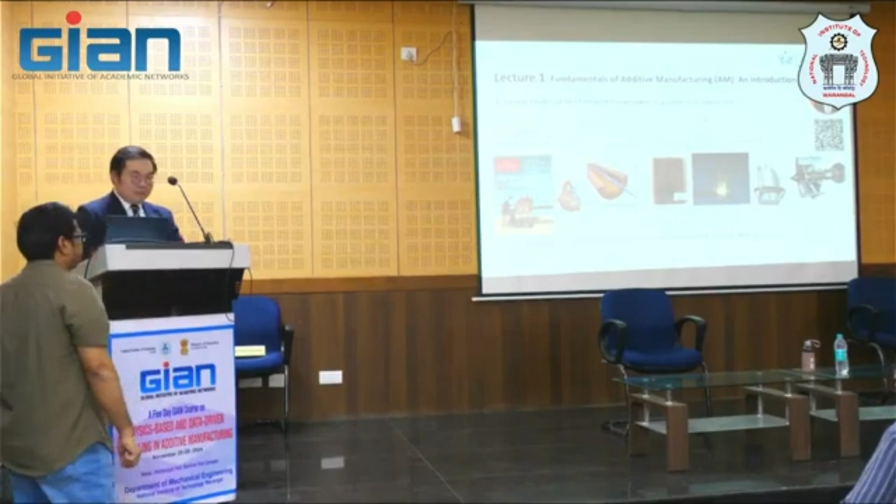I'm Chinnapat Panwisawas from Queen Mary University of London. It's a great pleasure for me to be here today, and to share with you some thoughts about the modeling of additive manufacturing, especially for metallic systems. And before that, I want to use this lecture to give some mutual understanding about what we mean by additive manufacturing, 3D printing, 4D printing, what they actually are.

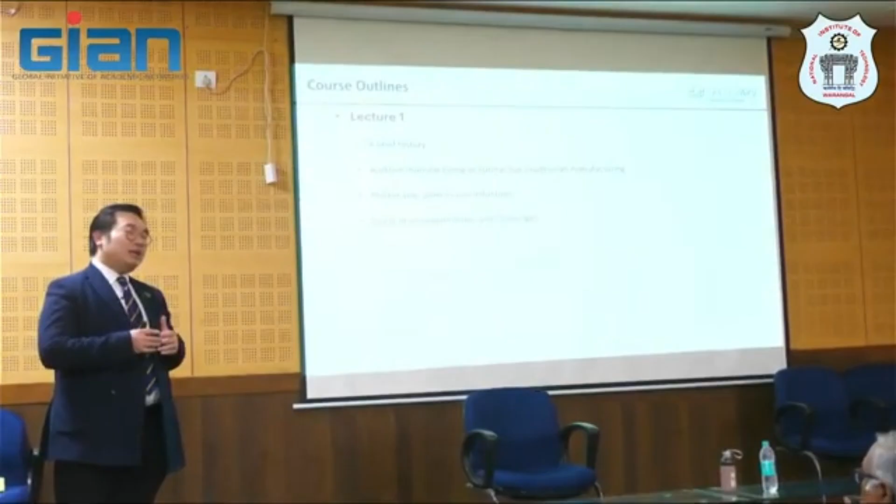About the outline of the first talk: we need to know a little bit about history, and then you will know that the concept of 3D printing or additive manufacturing is not new anymore. It has actually existed since the 1800s, something like that. But the way we use this concept for manufacturing is relatively recent, about 50 years.

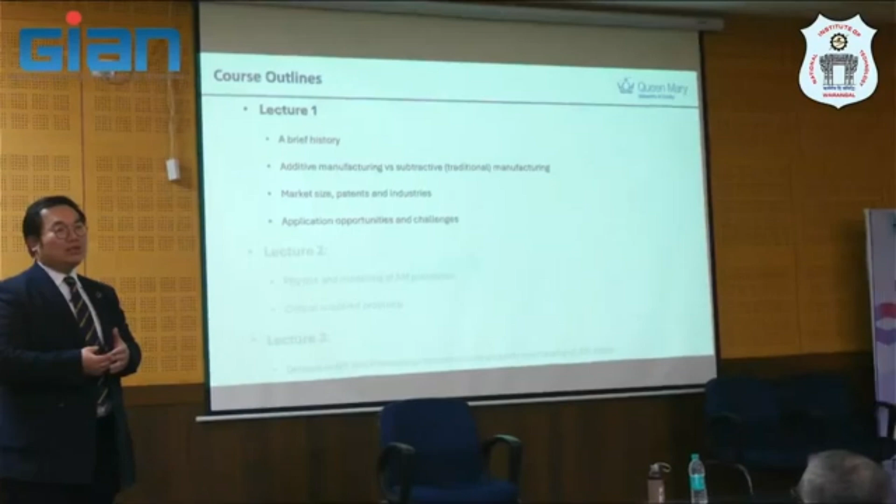And then after that, we will look into what is the difference, after the Industrial Revolution, from the traditional manufacturing processes, and then what the market and opportunities are that we have, as well as some challenges. So this lecture is intended to give the rationale or some fundamental understanding of additive.

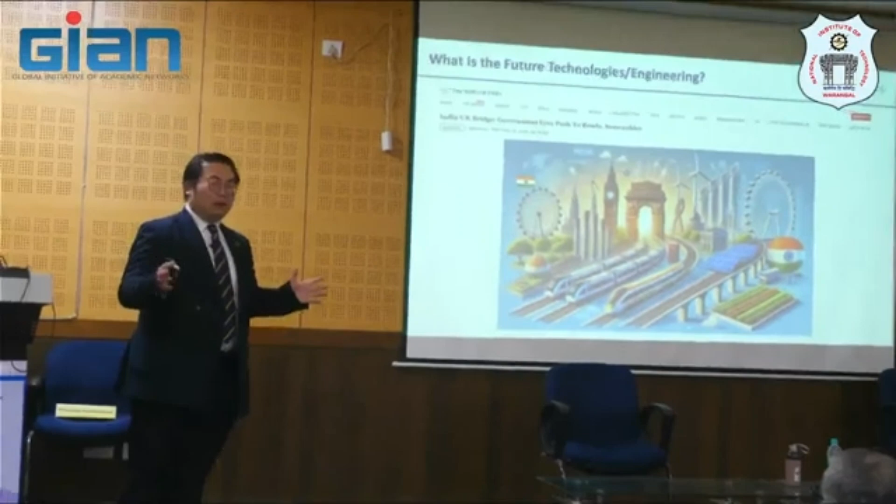So I just looked at this, it was actually released just this morning in the Times of India. I have seen an Indian-UK government program that wants to have a collaborative project. Don't look at anything, just the figure here. You will see that it means the future. We are talking about the future, right? The future is about green, about solar panels here, about wind turbines here.

And this actually creates an opportunity, not just for the UK and India, but a global opportunity that we can look forward to. One of the arguments about additive is whether it's worth investing, because it's quite an energy-intensive process. But if we understand the process very well, and that is the objective of the course here, I believe additive is one of the sustainable manufacturing processes where we can leverage the knowledge from science for technology take-up.

And I would like to start with something about the future. So this is the future that people are thinking of. I just borrowed this video from the Siemens company.

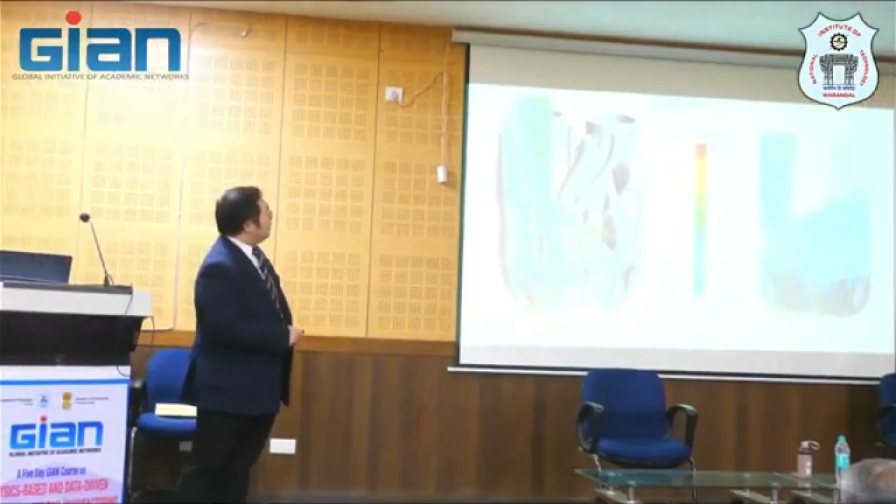Yeah, you will see from the CAD model to numerical simulation, and then going to the digital twin, engineering-based simulation. And again, this is a kind of design for manufacturing. This is a 3D printed part. Again, this involves simulation, CFD, STAR-CCM+ here for computational fluid dynamics.

And this is a robot-assisted manufacturing process. Again, this is a subtractive manufacturing process that you can learn about here.

The forces that push the robot away from the milling path can be calculated and compensated in real time, keeping the robot in its path. When it comes to operation, the digital twin can compare the sensor data of a real plant in real time with the simulation of its plant. The availability of the plant parallel to operation can be reliably predicted, and sudden disruptions become a thing of the past. But this is just the beginning. Digital twins with artificial intelligence allow computers to independently...

And then you will see previously the composition, that they have titanium or whatsoever. So just want to...

This is automotive application. The digital twin breaks the traditional paradigm and opens up extraordinary possibilities. That's why digital twins are the innovation backbone of the future. Siemens. Ingenuity for life.

Yes, and actually this is about the digital twin. It means different things to different people, but in order to get to that future technology, the digital twin of those fancy components, we need to understand what happens at the material scale. And what I'm going to talk about today is how to link material and process together. And that is the next slide.

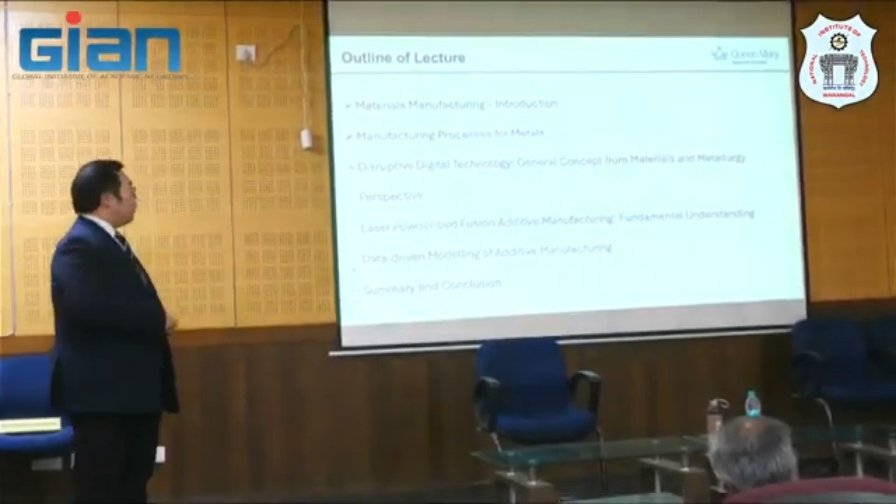This is one of the 7 additive manufacturing families following the ISO standard that I was going to talk to you about. What is the fundamental of that? Why is it so concerning? Why is it so interesting as well? Papers published in Science and Nature talk about closing the gap of 3D printing with the material, for example, that you may have seen in recent years. And then what is the perspective for me that sets the scene for the next few years about data-driven modeling for additive manufacturing? And then I will summarize the first, introductory talk later.

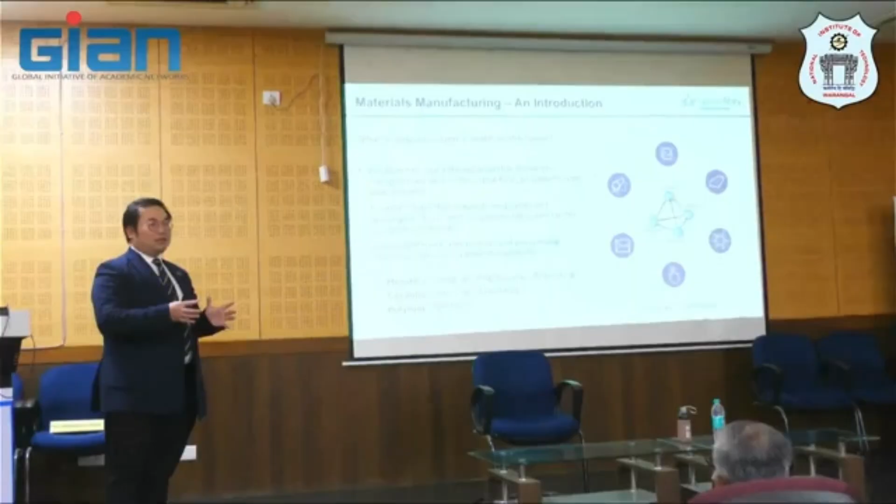So what is materials and manufacturing actually? When you talk about materials and manufacturing, it seems to be something related, but normally people seem to neglect both of them from each other. For example, it's evidenced by the departments. They will have a department of materials and probably manufacturing, or even mechanical.

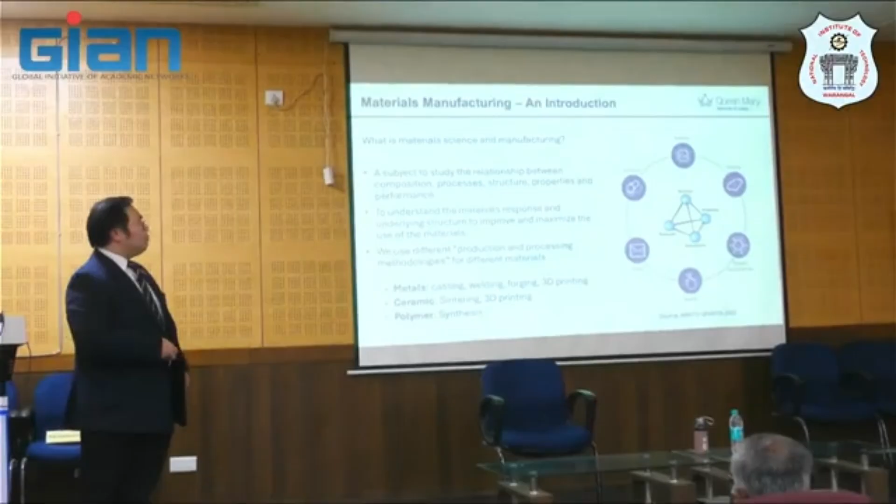I think it is important not to separate them, but to study this. What does materials science mean? It actually studies the relationship between composition, process, structure arising from the processing that you do, and then subsequent properties and the performance. And understanding this will improve and unlock the potential of the material that you use, to give it the maximum or full potential.

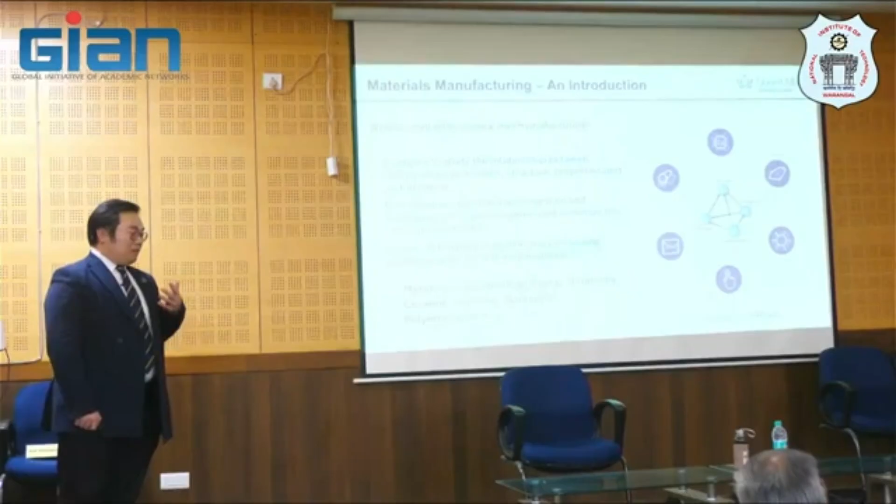And then normally we will use different processing techniques or methodologies for different materials. 3D printing is one of them, used across not only metal, but ceramic, polymer, and composite as well. So it gives flexibility of the design and also opportunity. But again, in order to make it right the first time, we may need to understand the process more. And this is what the course is about today.

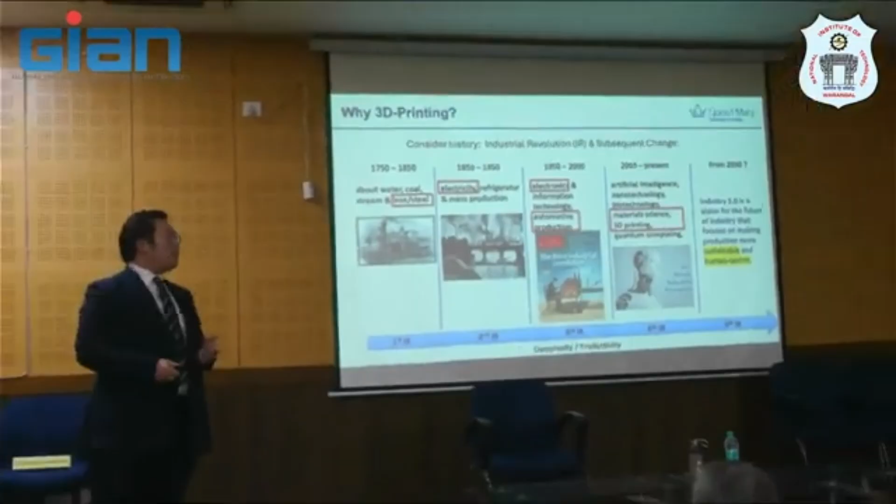If you look at the inspiration from the industrial revolution concept, the first ever is around the pre-Victorian age. You know that people knew how to make iron or steel systematically, but even in prehistoric times a lot was known already. And then with the first introduction of electricity toward the beginning of the 19th century here, refrigerators and mass production came, and this is where the new ways of producing things came.

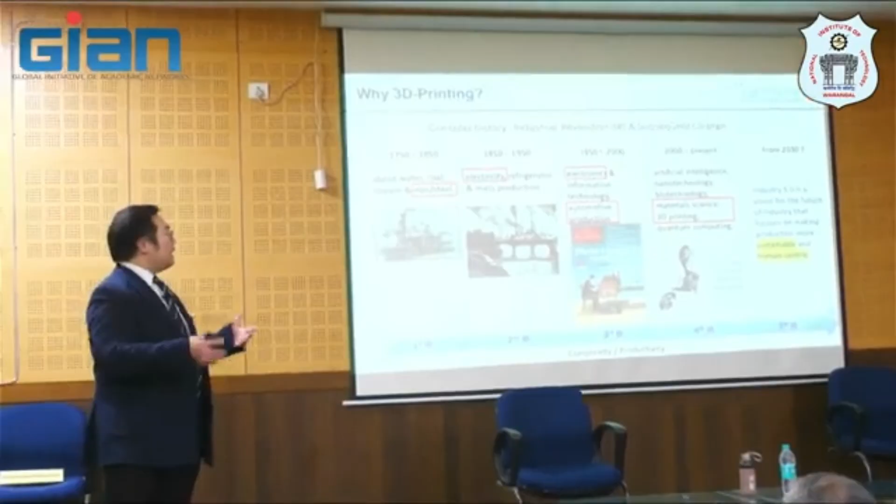I just want to emphasize this, and then we have another third wave, where we have new ways through electronics and automation processes, a little bit of robots coming in, to change the way we manufacture things. And after that, just very recently, artificial intelligence, nanotechnology, including materials science and 3D printing, play a role to revolutionize the way we make things as well. So from electronics or automotive, we make something better rather than wasting a lot of materials, by about 90%. I will talk to you more about that later.

And now we know how to make calculations faster by quantum computing, for example. And this will be the vision into 2030 onward, in my opinion, or even starting now: Industry 5.0. I don't want to talk anymore about 4.0 because we need to look ahead, when we have two important words, which are sustainable and human-centric. That means the interaction of humans and also sustainability is an important factor for AI and data-driven models or data science in the future that we use to make things better.

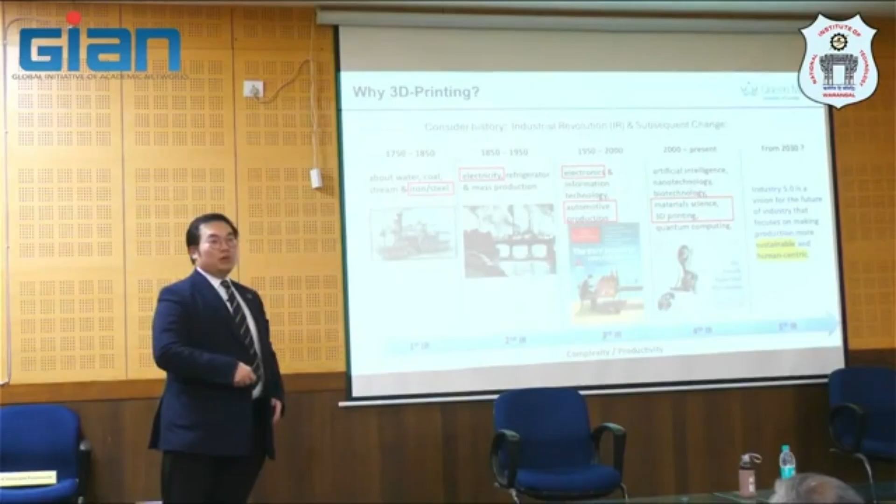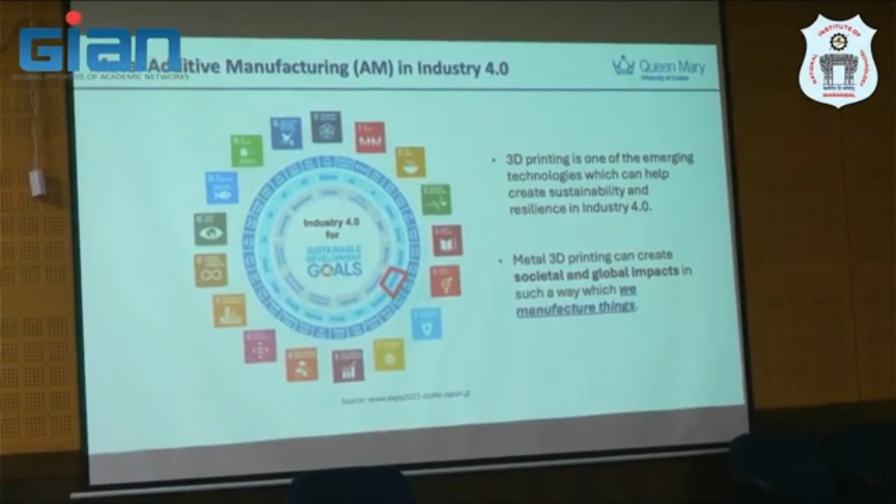And having said that, I give an example from another country in the East as well, Japan. They define 3D printing as one of the emerging technologies that we need for Industry 4.0, but they even introduced a new policy for 5.0 already. And this can create a social and global impact on the way we manufacture things. That is the importance of 3D printing. But the next step, when we realize how important this actually is, how can we make it?

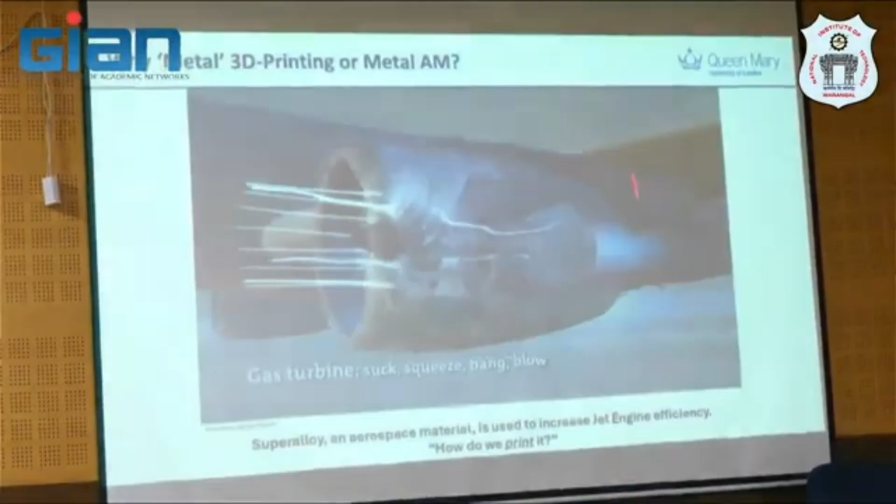And then we need to step back a little bit to see what we have now. So for example, if you are looking at the 3D printed jet engine that I mentioned earlier, I would need to emphasize that this is the high value added part that some of you may do research in aerospace material.

Your concern is, for example, you may not be able to replace this investment cast turbine blade at the moment, because the strength is actually compromised using 3D printing, but there's some way using electron beam melting that you can actually fabricate it in a single crystal. Again, a lot of research is going on to make that happen.

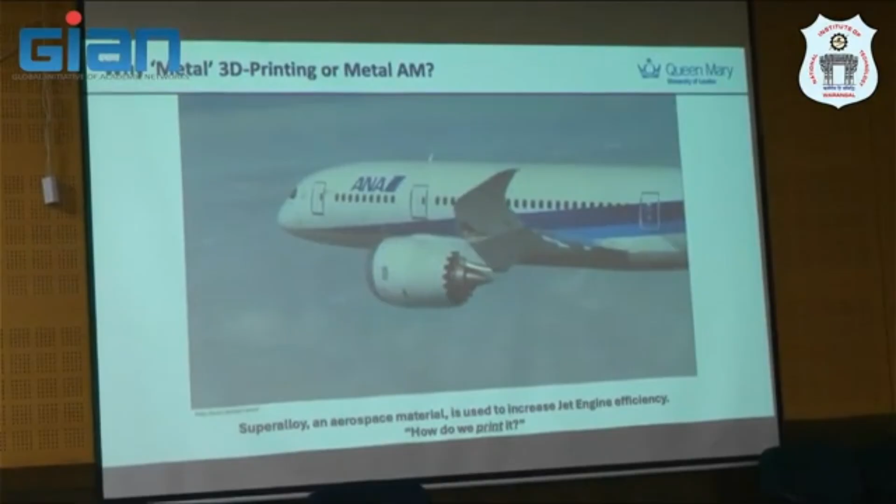Or if we try to print this jet engine, you may need to think about other components. For example, the first pieces of 3D printed part were flying in the air in 2012 by, what is the company, GE? Yeah, it's actually a fuel nozzle that I will give you some introduction to later.

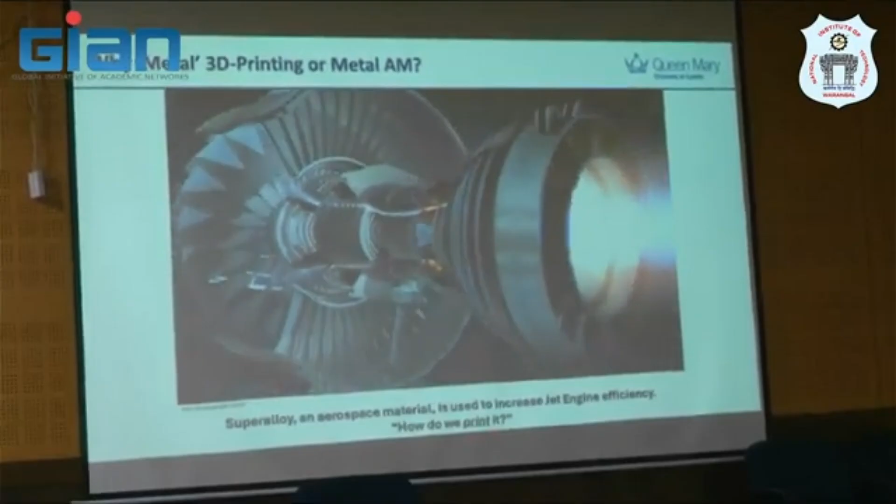So in this one, that means we need to understand not only the engineering requirement, but also we want to place the material in the right place in order to make it robust, and then manufacture it in an efficient way. So we hope that 3D printing can revolutionize or change the way we make the jet engine.

But just keep it in mind, and my question to this is how we print it, and print it without defect, because if it contains some defect, you're not going to find a defected blade to carry 300 lives. It's not good, right? So we need to make sure that in terms of material science, metallurgy, and also processing, we make it more regulated or standardized.

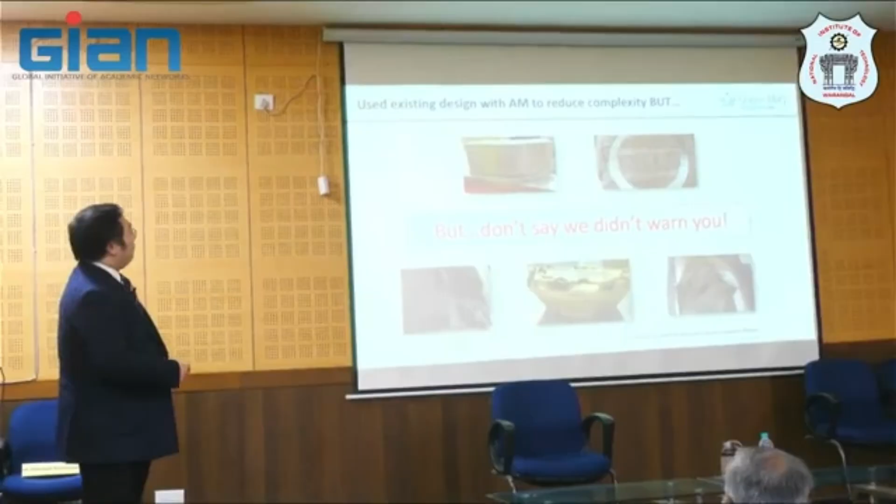So as I said, people are talking about 3D printing, but you will see this slide borrowed from NASA, right? Talking about, okay, you get a lot of defects, especially when you print a big part. And this is why we need to warn you that it's not that easy, not like printing polymer, resin, or some other component. Printing metal is challenging and something that we need to take care of from a scientific perspective.

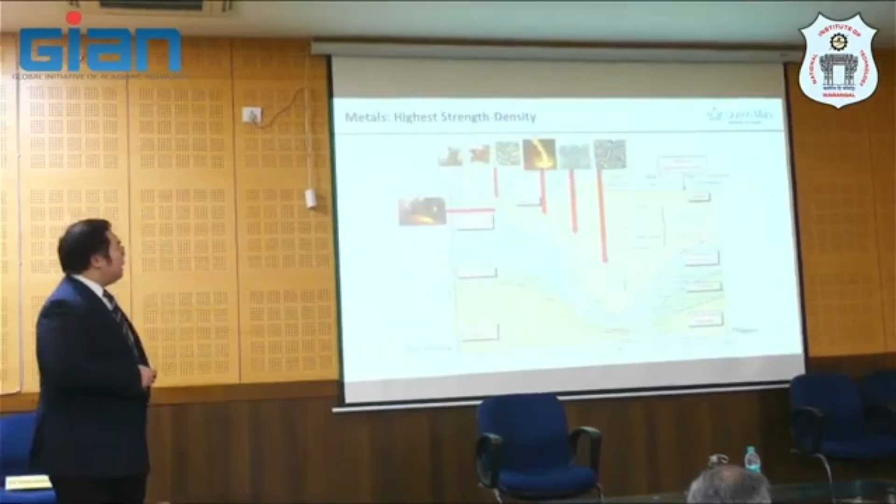So if we look at metal or metallic 3D printing, as I said before, every time we discover or know how to make things, probably at the very early stage, India has done very well with casting or steel making, as you know, you have a company on that.

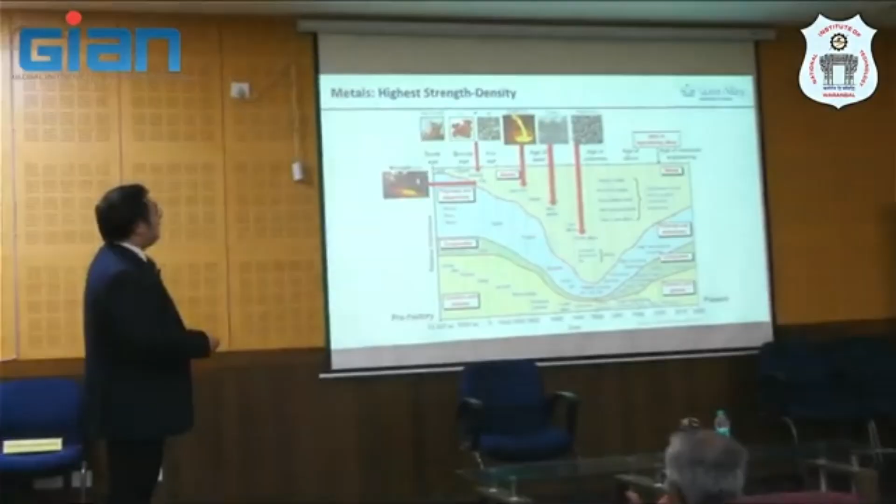And then what I'm going to say is that every time a new era comes, the age of, let's say, Stone Age, bronze, iron, or steel, and then superalloy, which is the high performance or heat resistant material here, you will see they have different requirements for different smart or advanced material. And now this is the birth of, you may have heard about, high entropy alloys, but again, this is just the way we want to map the whole material spectrum in this one chart.

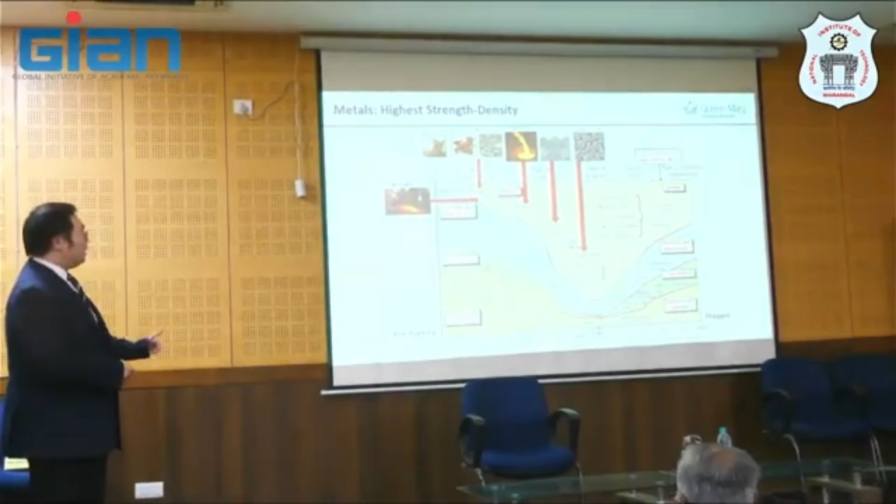So the future is going to be something lighter, stronger, a strength to weight ratio, which is reducing the weight but also keeping the strength, and how can we make it? So Professor Kumar may talk about design of experiment for metamaterial structure or lattice structure later.

Again, we want to understand this. Why? Because when you print titanium and print nickel or print shape memory alloy, it's probably a totally different story. So we need to understand material science first, as well as the processing of it. So this needs to come as a package. And then this is a summary of one example, actually, superalloy.

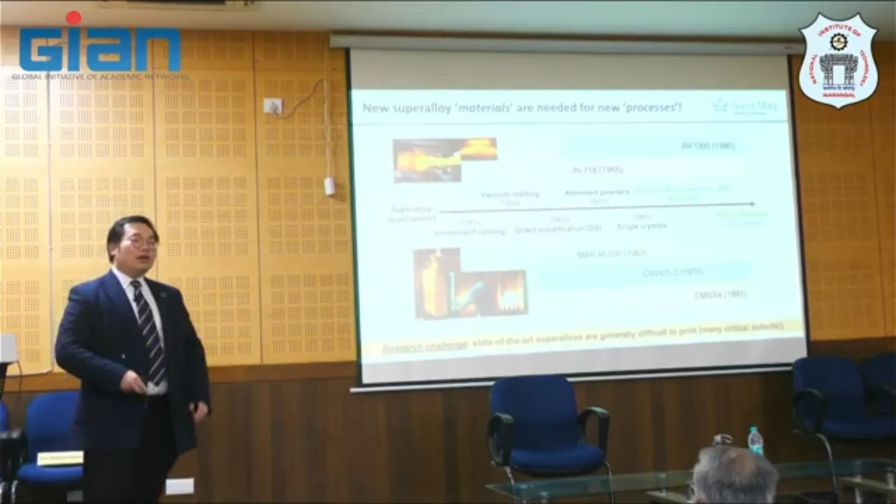Is there anyone here who knows about superalloy? High temperature material, heat resistant, highly resistant to degradation, right? Like creep, fatigue, blah, blah, blah. So superalloy is one of, I would say, the most clever materials on Earth. It's about 80 years old now, since its inception in about the 1940s by investment casting.

But again, the graph here shows that when you introduce a new process like directional solidification, single crystal casting, or powder metallurgy, you usually introduce a new composition or new material to optimize for that process. So this is an example, like casting. This is likely to be the first generation superalloy optimized for casting, which is MAR-M 200.

And then you have directional solidification, which is actually a polycrystalline structure, CM247 LC, but people are trying to print 247. I would say, what is the problem?

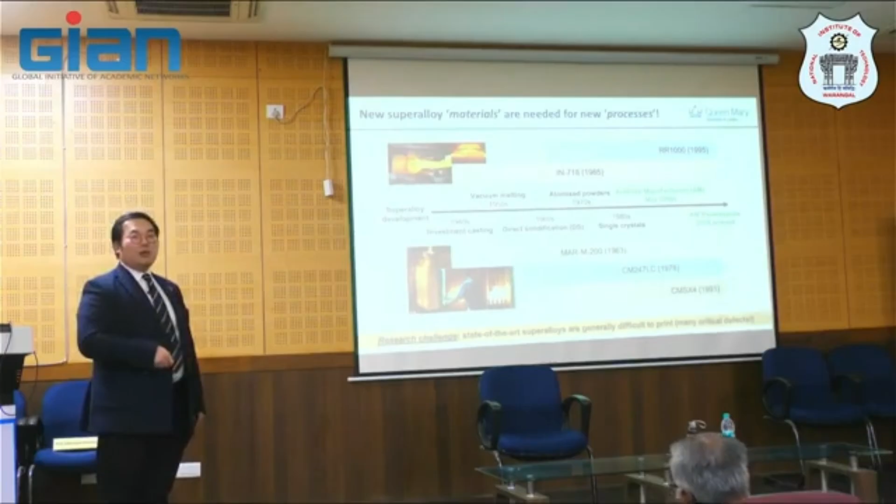And then single crystal, this is the CMSX4, which is a second generation superalloy. And again, each composition here is optimized for the process, and that works, actually. People are even trying to replace CMSX4 with high entropy alloys, but when you consider all the factors, it's not really happening yet, because it isn't worth investing in a new composition which doesn't have a superior combination of properties like

the existing material. But my question on this slide is: when you have a new process like additive, which is actually not new, metallic printing was introduced around the mid-1990s or about 2000, can we use the existing material, not only superalloys, with the new process? The answer I will show you later is probably slightly no.

That's because when you decide the composition for each process, you think about different criteria, or you engineer it differently. So that's why we need to understand both metallurgy or material science and the processing science of it. And before we go into the process, I want to give you some inspiration about 3D printing, the process we call additive manufacturing.

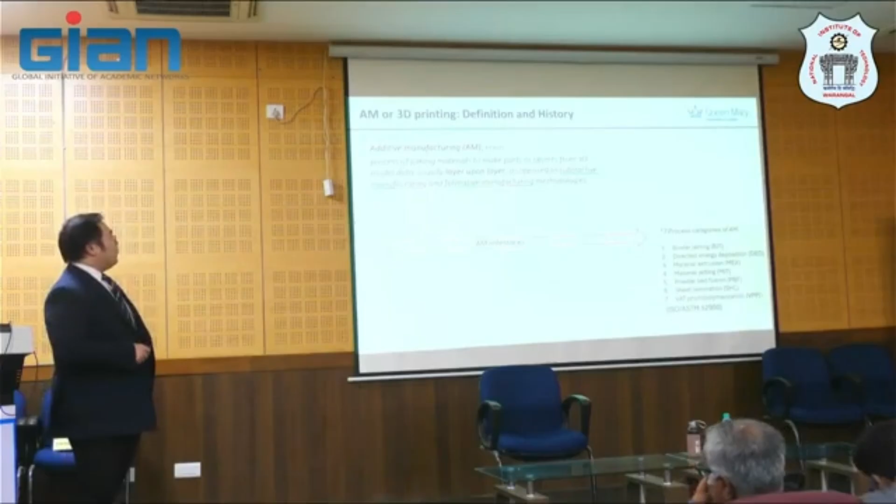What is that? If you take the definition from ISO ASTM 52900 here, it says the process of joining material to make parts or objects from 3D model data, layer by layer, as opposed to subtractive or formative methodologies. I will give you some examples later of what is meant by subtractive or formative technology.

And actually, as I said before, additive manufacturing has seven process families or categories, listed here. Everything falls into these seven, believe me. You have a lot of abbreviations, but they fall into these seven categories. Binder jetting I'm not mentioning much, but for example, Desktop Metal lets you deposit your binder onto the metal powder bed, create a green part, and then sinter it later.

Directed energy deposition is used a lot now; one of them is WAAM, wire-arc additive manufacturing, where you use a wire and melt it layer by layer, for example to repair a turbine blade or wind turbine. Material extrusion is similar, but not the same, as MIM, metal injection molding. With that one you have a mold, but with extrusion you don't have a mold, you just extrude your material after combining your binder and your material together. This can be used for metal as well.

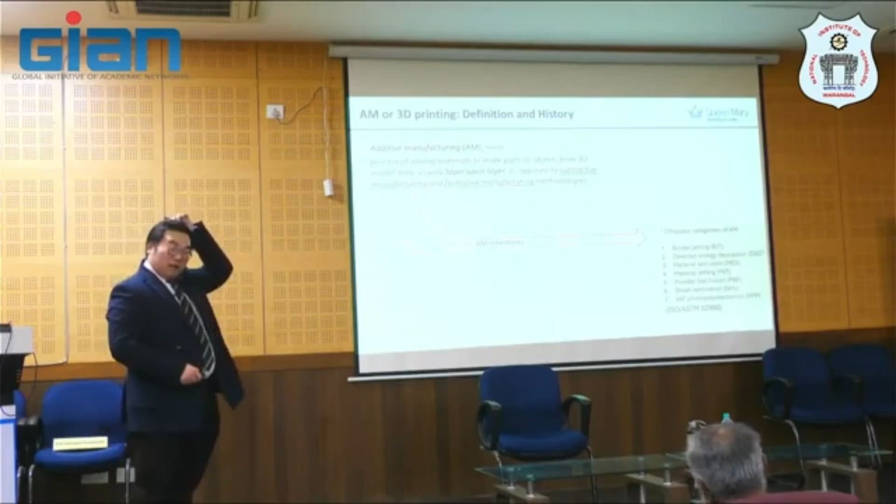Material jetting is where you deposit liquid metal, or some material, and create the 3D structure. Powder bed fusion is something we're going to talk about a lot. It was previously called selective laser melting, but under the standard now, even in publications, we no longer use selective laser melting. The Additive Manufacturing journal will reject based on that; it now has to be called powder bed fusion. Sheet lamination is another process. It's not a very popular research area, but there's something there.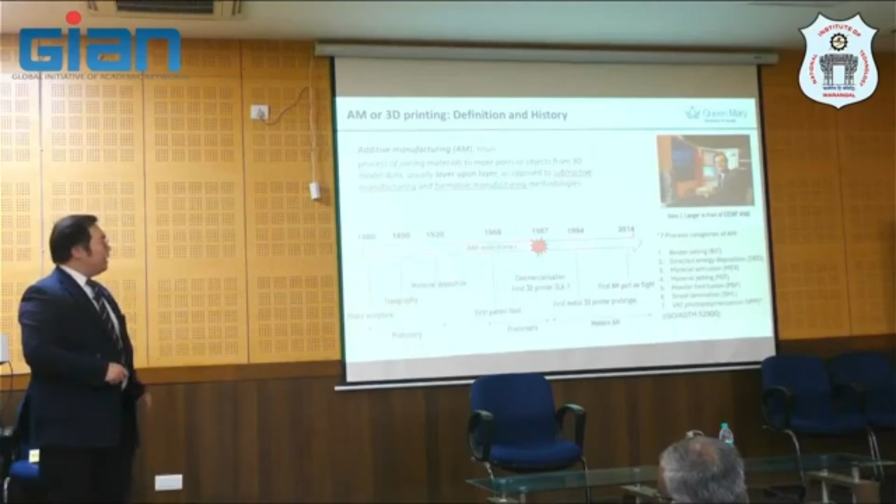Believe me or not, it's been more than 60 years now since the inception of the first additive machine ever. And it was commercialized nearly 40 years ago, in 1987. It's not new technology, but the way you make the material in the jet engine is probably new. Then you have the first metal printer prototype in 1994, just pre-millennium. And then the first part to fly, by GE, around 2012 or 2013. So this is entering the modern additive manufacturing we are talking about now.

So he's quite an important guy as well. I think you know the EOS company from Germany, right? Or US, I can't remember. I'm not an experimental guy, but he's the one looking at the very first model of the EOS machine back in this period, about 30, 40 years ago.

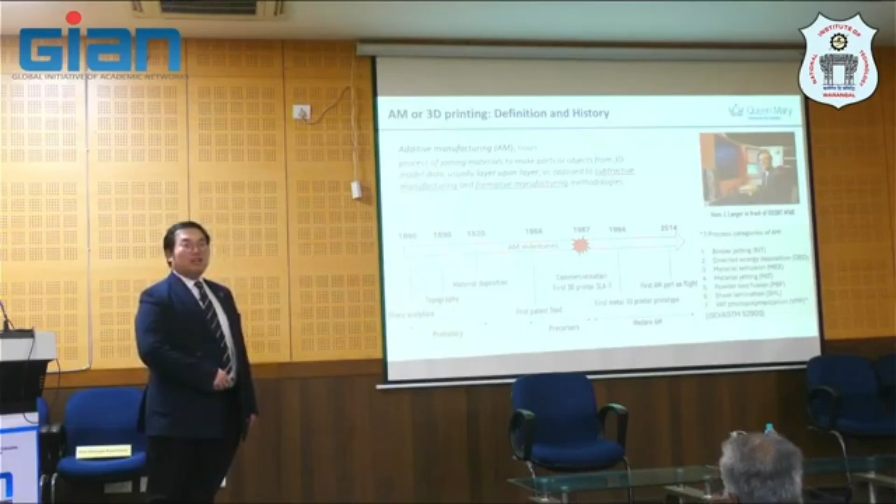So the prehistory of the photo sculpture, I'm talking about here, and this is because we're looking at the US patent back in 1864. Actually, you have something like this, that you try to basically add material bit by bit. At that time it's not layer by layer yet, but this is a concept of additive. You don't actually machine something out, but you add something in to create some structure. And this we call the prehistory time of additive.

And later in topography, you will see in about 1892, you actually have the way to manufacture this contour map. So the way you do this, you actually add layer by layer. Like this is kind of Lego pieces that you build a kind of mountain or whatever structure you can imagine here. And this one is likely looking like additive. You add layer by layer, and then you create some 3D structure here.

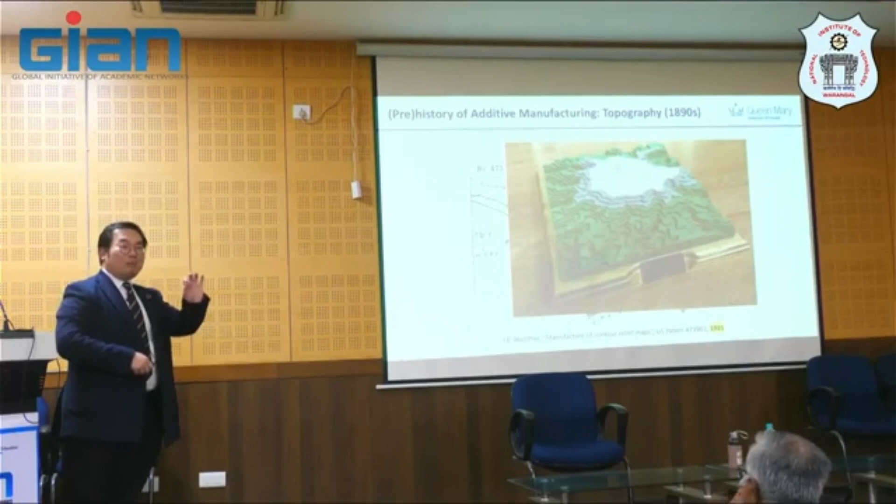But the mesh size here or the pixel that you deposit is quite coarse in this sense. But let's imagine this is just 1892. And the next one is a patent on material deposition actually filed to make a new decorative article here in 1925.

And after that, in early stereolithography, the first ever patent to build a two-laser system, now we use laser to build a 3D construction of photosensitive polymer. Okay, it actually starts in the material polymer. So this process is optimized for polymer. That is the message. And then this is the method, along with the apparatus scheme or drawing that shows how to make this production for this polymer using two lasers here.

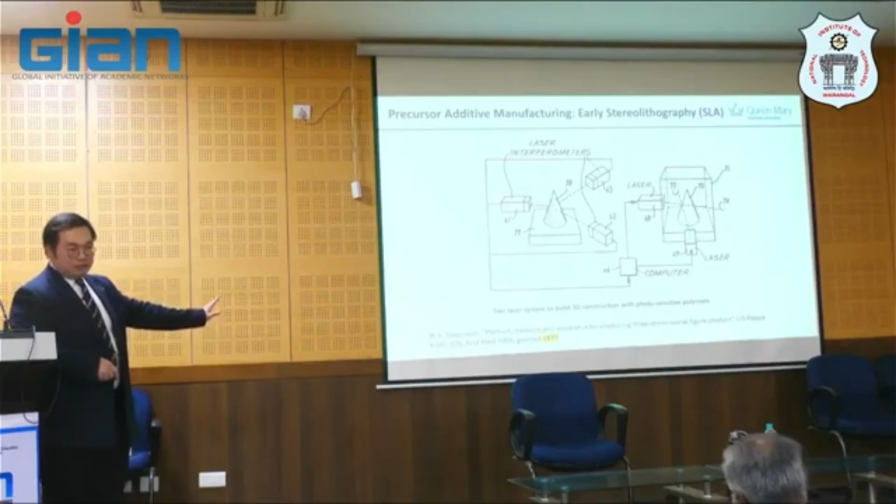Again, this is the patent granted in 1977. So I will base the date on this documented evidence here. So that means this is probably, we can say, a very early stage of modern additive manufacturing machines.

So the next one is about one Japanese guy called Dr. Kodama that actually proposed something on the new 3D printing. Again, it's based on the idea of stereolithography, coincidentally. And then he needed to actually withdraw his application for the patent because of a funding issue, something like that. Because as you know, to apply for a US patent is actually a lot of money, it's an investment, right? To let the world recognize it.

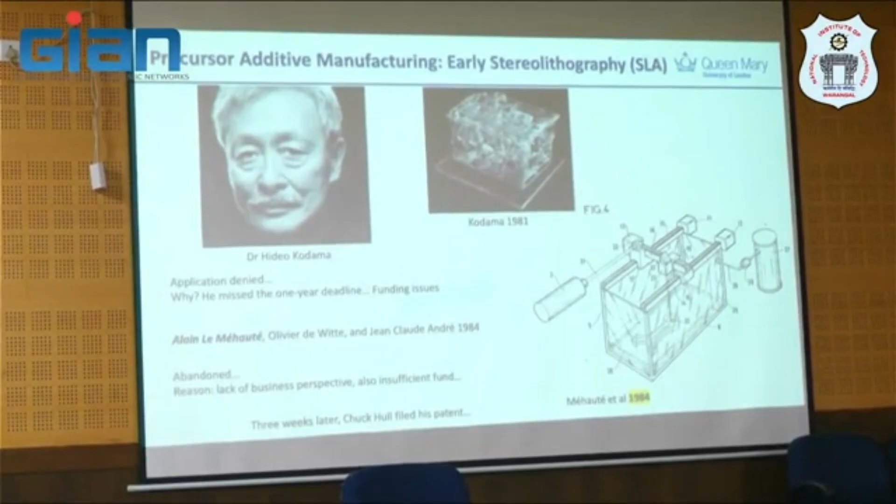And someone said to me that this is going to be a very expensive process. If you talk about additive manufacturing or 3D printing for some high value added part, you're not going to waste your money to print something that doesn't actually have some value, right? Because additive is for niche applications, like implants, not construction for sure. We're not going to print metal for construction.

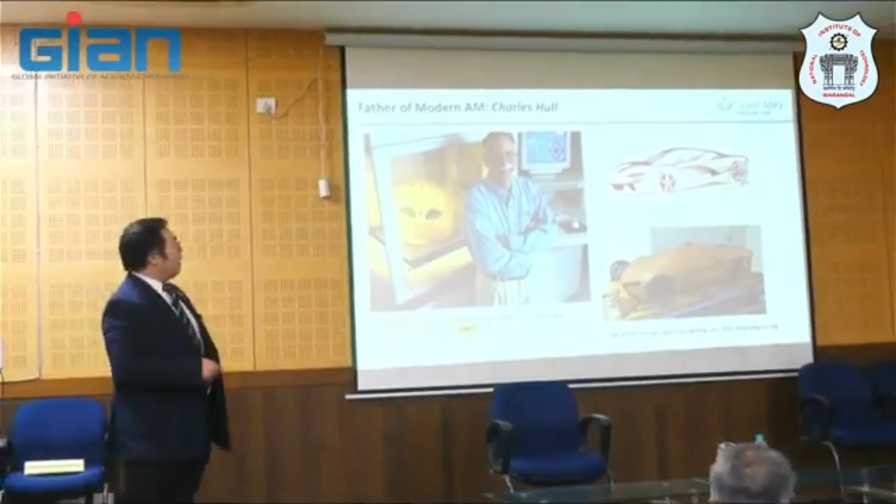But if you look at, for example, the automotive area, like motorsport or luxury cars, you see that the designing of the car is actually more expensive, twice as expensive as the manufacturing cost itself. So when people say that additive is such an expensive process, it's probably not true in some areas. So the answer to some of my previous colleague's question is that we need to select the correct application for metal 3D printing.

We're not going to print metal for everything, but there are some areas which require kind of delicate care, like blades, or in aerospace, some automotive parts. So that means engineers, material science, mechanical engineering or computer science need to be involved to move this field forward.

So I would like to give some review of the methods, give you some context about different modern 3D printing technologies. So the first one is stereolithography, or SLA. I believe you know it, or every lab, probably in your lab here you have this as well. It's a small and affordable machine that every university can have for students to do projects with.

So this is just a light, and then you have a resin, put it there, probably a heated substrate, and then you basically have a liquid bath here as well. So this is an affordable kind of machine that may be useful as well for bioprinting.

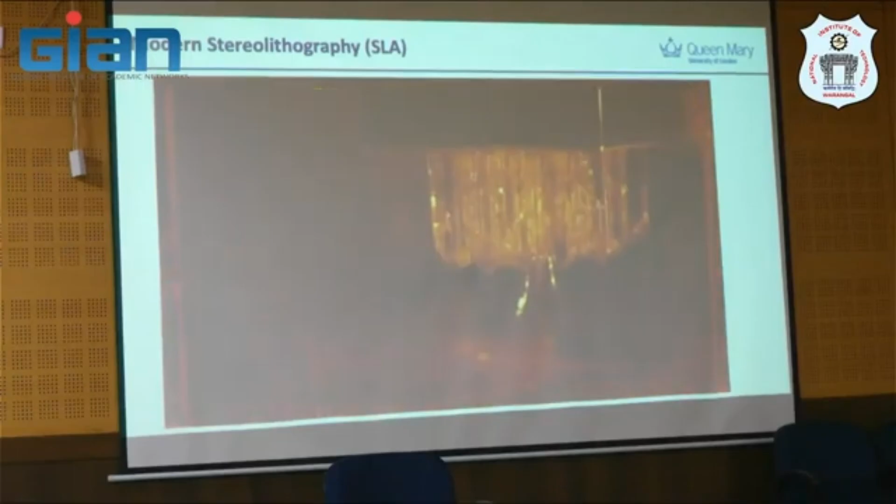This machine can be adapted for tissue or this kind of printing as well. But some research needs to be going on. Again, that's what I said previously: we need to select the material along with the process that we're going to use. So in this case, it's probably not for metal. But anyway, that's just to review, and this is called wire-based additive manufacturing.

When you deposit the material, this is the laser nozzle, right? And then you use arc wire, this is wire arc additive. So you add it layer by layer until you get the 3D structure here. So this one we call near net shape manufacturing as well, because you don't need to do much after that.

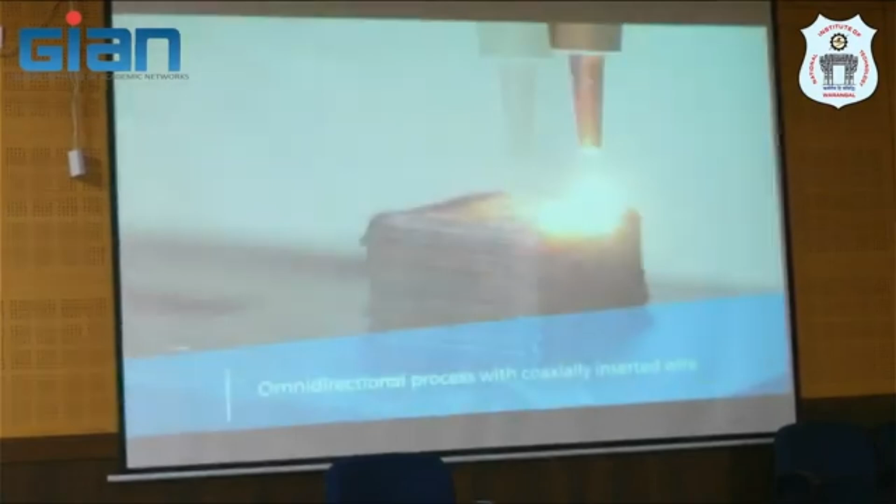It is a slow motion of these things. But you will see that it still has a problem. You see a balling effect or surface roughness here and a melt pool whatsoever. But this is something to concern next lecture, don't need to talk about now. But you see layer by layer here, it's like making a cake. You add layer by layer, and then you get the pieces of cake here.

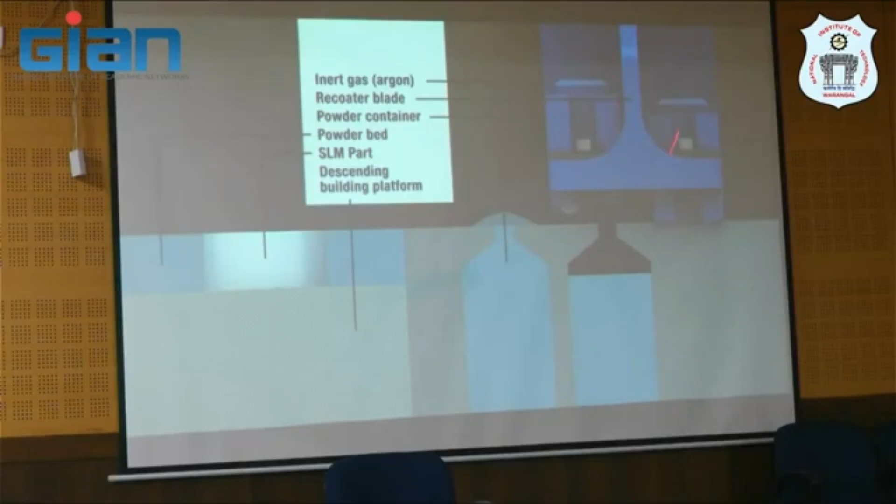And that's an example. The next example is actually powder bed fusion. This is something we're going to focus on in the next few days. You have a chamber here. You have the powder feedstock here. You spread the powder onto the substrate, however many substrates you have. And then you swipe it in another direction, and it goes into this used powder. And you use a laser to fuse them layer by layer until you create a 3D structure.

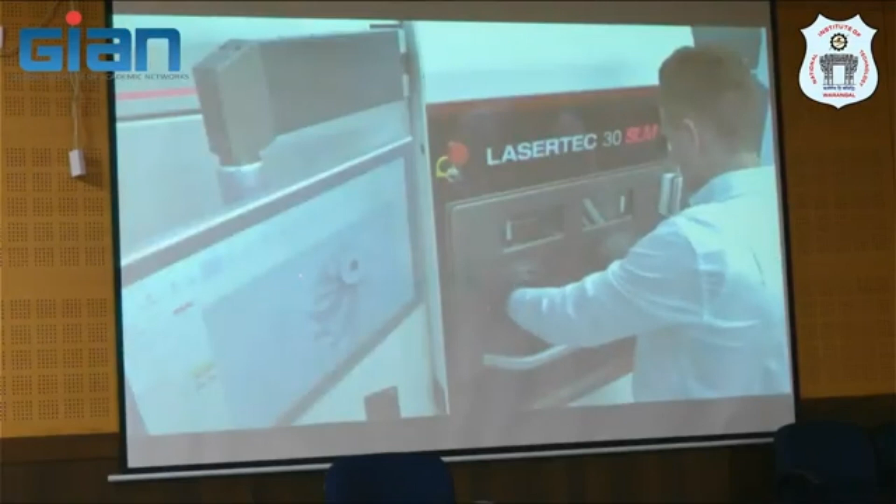In this case, I think it's probably a turbocharger for automotive. Again, this is a delicate part that usually takes about 40 manufacturing steps to manufacture, but you reduce it to one without waste. That is the key idea. But the thing that controls the quality of this part is actually the laser matter interaction, which we are going to focus on in the next lecture later today. You see now a lot of spatter coming out. And when you remove it with care, you will get the part 3D printed.

Again, the health and safety issue here is delicate, and it's an expensive process. That's why I said we're not going to print this one for a microphone, for example. It's too expensive. But if you want to do it on purpose, probably yes. We need to be careful about that. And then you get this part, and you can see that there's surface roughness and support structure associated with it. Again, this requires not only metallurgy but also engineering, mechanical design of experiments to allow this to happen.

So if we summarize this one quickly, the pro of this process is that you get a near net shape of complex geometry. That is why you use this process. And then you can do rapid prototyping. If you don't do something wrong, we expect to get less scrap and waste when you know the conditions well.

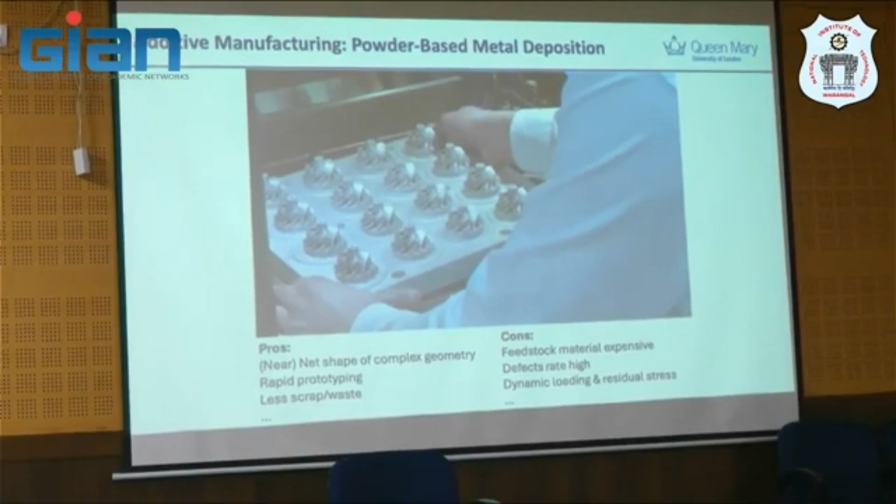And then the con, or disadvantage, of this process is that the feedstock at the moment is still expensive. High quality feedstock, especially for biomedical or medical grade implant powder, will be expensive. Titanium, for example. And the defect rate is still high, but this is why research is important, to reduce that once we understand the interaction in the material.

And then residual stress is another issue, and people look at that from the composition, processing, structure, and property perspective. This has become an issue, but now a lot of research is going on trying to make it possible. Like for the material structure, you can design a lot of properties outside the range of the bulk property. That is not possible using only a CNC approach, where you cannot get the internal structure at a micrometer length scale. So that's why the application is so related to the process you are going to use.

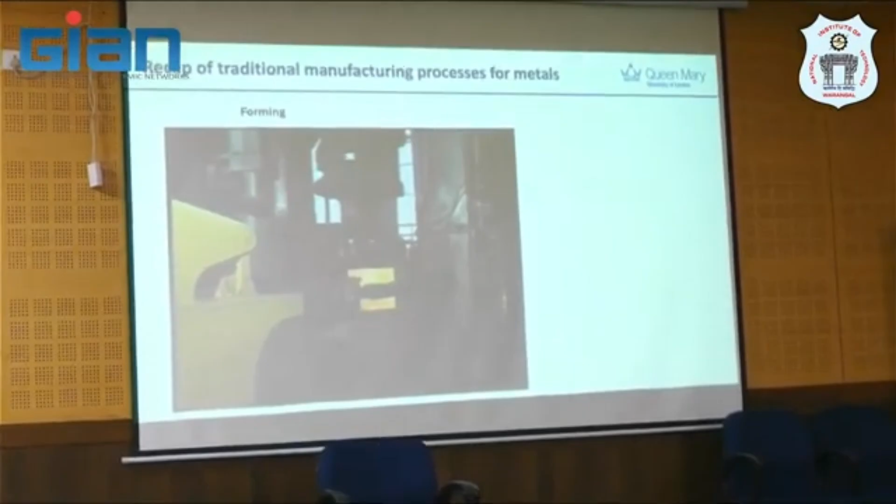To recap, that is additive manufacturing, but now we are going to talk about how we can replace those traditional processes, or even if we cannot replace them, understand what the traditional processes for metal manufacturing are. So we have forming, casting, joining, and machining. I would like to make a big distinction between joining and additive manufacturing. In joining, you sometimes don't need to add material. If you don't use filler material, you just use some power source and fuse them together. We call that joining.

The difference between joining and additive is that additive is adding material and joining them together. So that means, in my definition, welding and additive are different. But people may say it's the same. But anyway, I will show you why it's different later. Probably by lecture 8, you will understand why I make it different.

So this is a forming process, and this is a big forge hot ingot machine here. You will see, probably you sit in the steel manufacturing plant, and then after that you punch this. I believe mechanical engineering also needs to learn about manufacturing processes like this, right? You upset this one, you get some skin, you punch it, you forge it. And then the way you forge it, and the temperature and whatsoever, and then you drill the hole to do the ring rolling later. So in a very hot state, you drill the hole, do ring rolling later.

You will see that this is done with care. And this process has been done a long time ago. It's not a new process at all. Robotic or robot-assisted additive that you talk about is actually using something that already exists to do things here. And after that, you roll it. This one I want to say later is linked to the microstructure development.

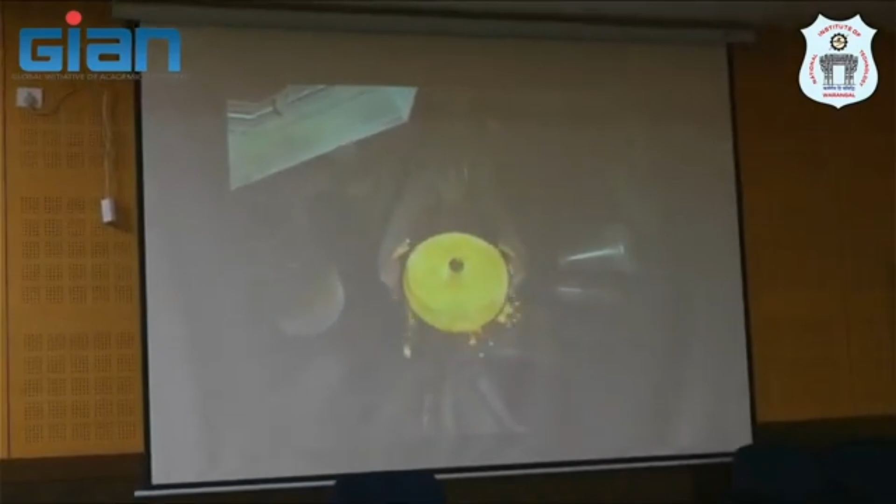The way they do it is actually to make a near uniform grain size in order to get the property across the section uniformly. Otherwise, if there is some weak area, you won't be able to make it fly. For example, if this one is a disc, or this one is the ring for an engine, for example. And that is the thing.

So later, in probably the next lecture or the lecture after next, you will see how we simulate this process to get the correct thermal and stress field in order to optimize the process and get better understanding when you want to change the material. Let's say from steel to titanium for a jet engine component, for example. And this is the thing.

So if I summarize this, we call this a subtractive manufacturing process. You will say that because it's subtractive, you actually waste a lot of money. Money and also material as well, environment as well. Microstructure is supposed to be uniform. That means it's quite a robust process that's used in quite high value added manufacturing companies.

And then the mechanical property, given that the structure and property are strongly related. So if you get the grain size, according to the Hall-Petch relation, you may get similar strength across the section. That is the ideal, but in reality, things like that need to be optimized. But anyway, leave that for another matter. It's not additive.

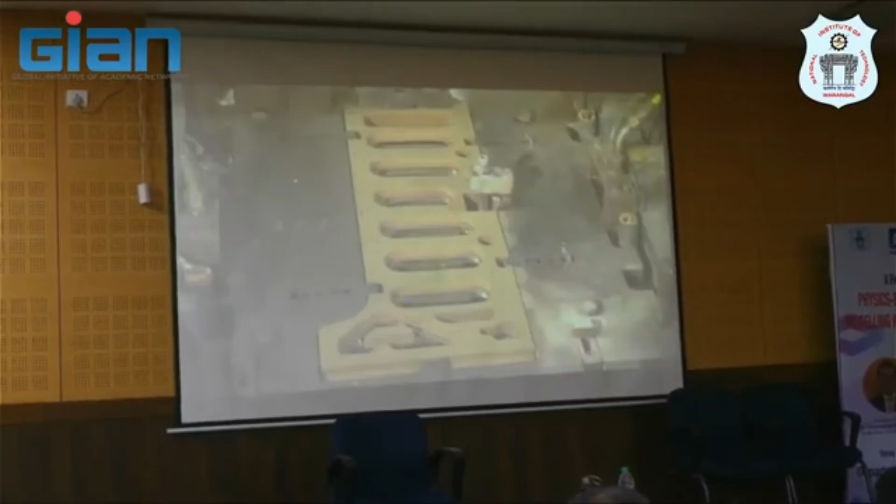Stop. And then they start to solidify and shrink a little bit to the central here. And later you will remove this part. Again, robot is used for this kind of purpose. And then you get quite complicated geometry from this process. And then you see this is an automotive part here.

Again, this process is ideal for complex geometry, usually with good surface finish. And then the con of this one, or disadvantage, is that the equipment is so expensive. And somehow you compromise the mechanical property.

Again, if you notice, the previous process relates more to the solid mechanics part, and this one is actually more fluid. Because you have the fluid, actually liquid metal as a fluid, flowing into the mold. So please keep this in mind, I will use this later.

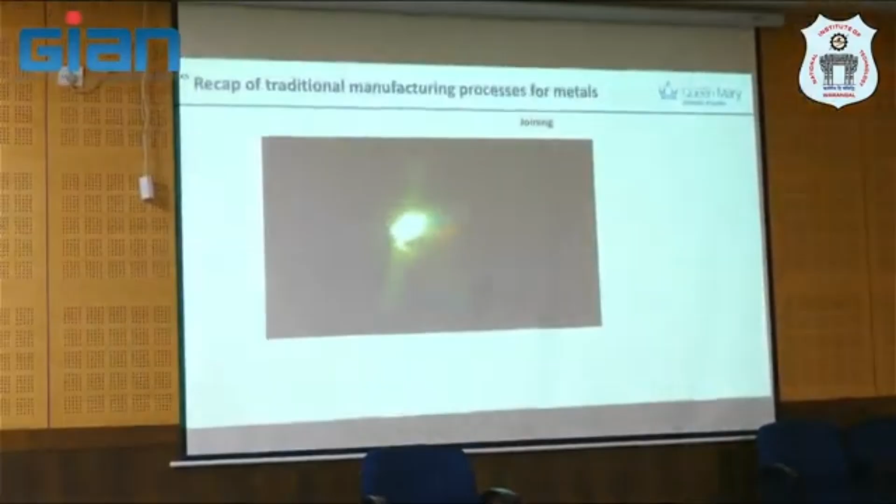And next is joining. As I said, welding. This is torch welding in this case. So you weld it. You have some material here, and then you melt it in a specific location, and then you join them together. Or you use something called, and this is the structure that you will see after that process.

And then sometimes you don't need any material to join them together. You just use a frictional force, linear friction, or rotational welding, friction welding. So you rotate the material at very high frequency to create a kind of joining area, ideally not to melt, but these two pieces will join together. And that is what we call welding integrity that you want.

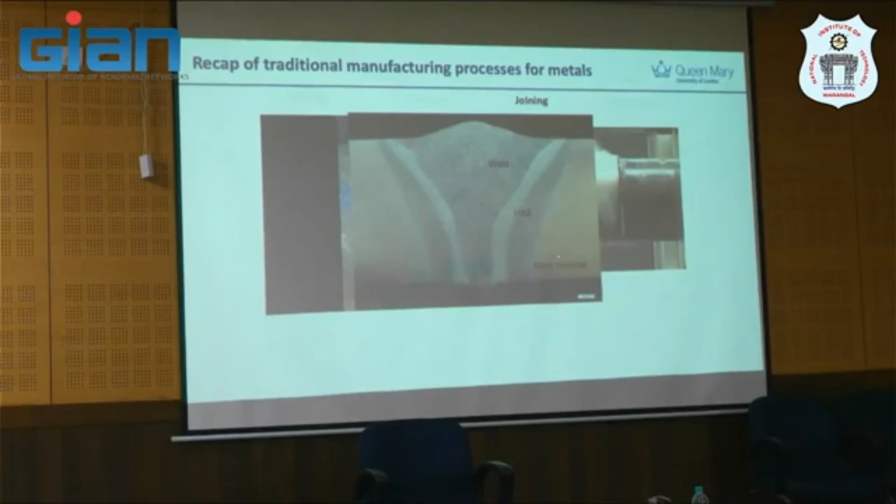The weld is the weakest area, due to the microstructure in the joining part being different from the parent and the heat affected zone. So here the phase transformation kicks in. The base material, heat affected zone and welded zone have different microstructures, which are subject to different properties. And then you may get the weakest zone in this area. And this may be an issue if you don't manufacture with care.

To summarize, this one is used for repair or rejuvenation of the material. And then mechanical integrity is important. You can use this for dissimilar materials like steel and nickel, for example. And then as a disadvantage, you may create some residual stress, especially in this zone. And this is the weakest area.

You need to take care of this area. The local microstructure in the weldment zone is changed. So you need to look after this very carefully in order to get the property right. And then fatigue and distortion under dynamic loading will be important if you don't make this right. And this will be the failure area for, let's say, a flying engine, for example.

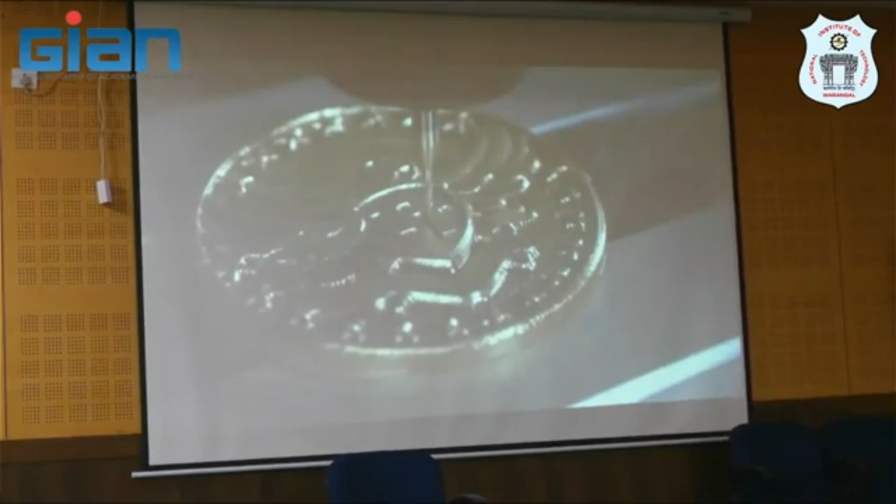Last but not least is machining. I think it's inclusive. I think you know a lot if you're familiar with 3D printing. Machining is a kind of CNC approach where we use the machine to remove the material to get the shape that you want. Again, the remaining material that you want is probably only 5 to 10% of the raw material you use. So this is not sustainable, but we have used this for a long time.

But the way to make it sustainable is probably dealing with the scrap or swarf material that you're going to use for future application, for example. But again, this is machining, traditional, typical, every country has it. And just to summarize, the surface control of this is very good. And then you get a very net shape, because that's what you want, like a screw notch or whatsoever.

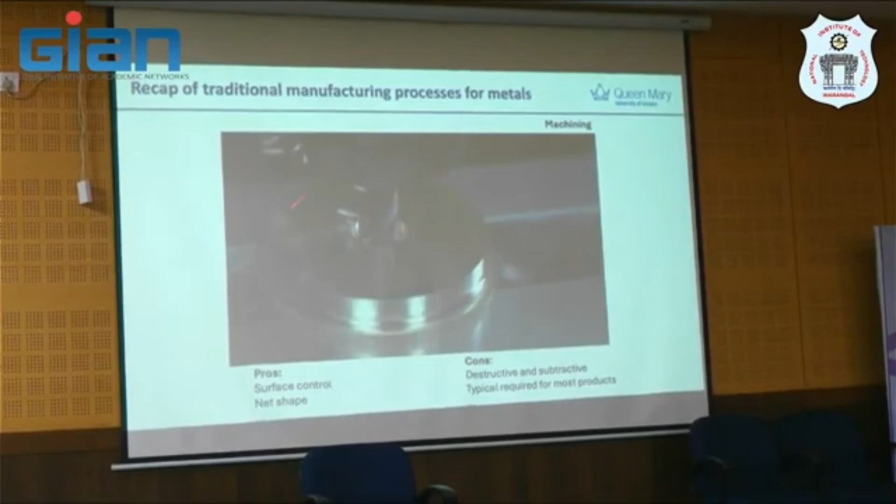And this is destructive and subtractive. That means you destroy material and then you remove it. And as I said, most products require this kind of precision. Some companies call it precision manufacturing, but again, this is not a very new manufacturing process. But anyway, just to make you aware of this.

But if you compare additive with traditional manufacturing processes in terms of economics, you will see that the cost per unit piece for traditional, if you do very small quantity, is so expensive. But if you do mass production, the cost per unit piece is very low. And this is preferable for a company, right?

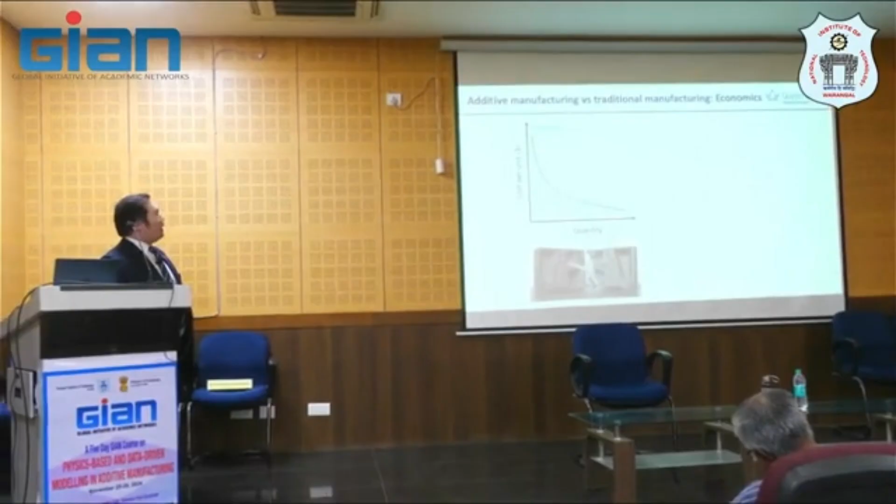But for additive, the cost per quantity is not very much different. So it's a very straight line. So whether you make 1 or 1,000, it's relatively the same. But again, the way you make it without waste is important. It's not just making it. It's about whether or not you have a robust approach to do it correctly.

There's a break-even point here. So this is not going to work for the traditional process, for example. You're not going to make a mold for this complicated shape. You may need to use another approach.

So with the new design and the additive process, you may be able to shift this one to the right, but again, it's not comparable. I mean, you shift the break-even point here, but anyway, additive is still better.

So if you compare the cost with the complexity, if you have a very small complexity, your cost is not a lot. But if your part is so complex, a traditional process like CNC or machining is so expensive. But additive is relatively in a different direction from this cost per quantity. When you have more complexity, the cost will be slightly increased.

It's not massive. Again, we may need to design with care for manufacture or do some analysis on thermal management on this part in order to get the minimum stress and distortion, for example. And this is perfect for using this kind of process for metamaterial design. And this metamaterial, which is the future of manufacturing, the idea is that you want to produce a new property far away from the bulk property.

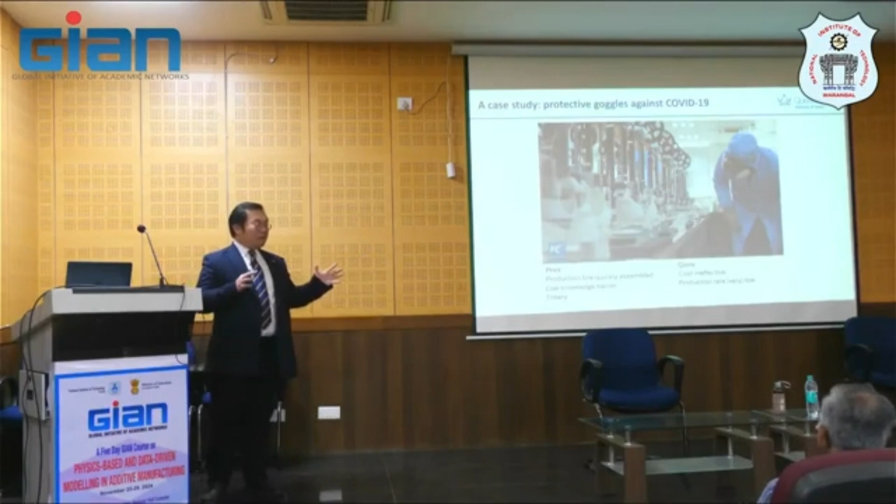But again, we also used this during a very difficult time in the past 3-4 years in COVID. The goggles here, we printed by additive, to fit different people around the world. For example, in Asian countries and European countries, you may not be able to have one size fit all. So this may be useful to print. And definitely this kind of 3D printing concept has been used in production line assembly already.

And again, for this one, you don't need to take much care. Even if it's important for life, it's not a flying component, right? It has a low knowledge barrier, and it was timely for this pandemic about 3, 4, 5 years ago. And the con of this one is it was cost ineffective at that time. It still is now, but we need to find a new business model to make it effective. And the production rate is very slow.

Even though we can use this fusion metal additive to produce this part, it's still relatively slow compared with a conventional process. But by the way, we get more personalized, and this is the future. Sustainable, personalized, and all these things.

And if you look in terms of the market or economy, the patents filed for additive since the first machine was manufactured, in 1980-something, you see it's increasing, from about 50 to now. Now it's more than this. It's actually shooting up to about 1,000 now. So cumulatively there are a lot of patents in the AM industry, in short, the additive manufacturing industry. But the applications submitted are far more, 3 times more than those accepted or issued. Anyway, it's still an opportunity.

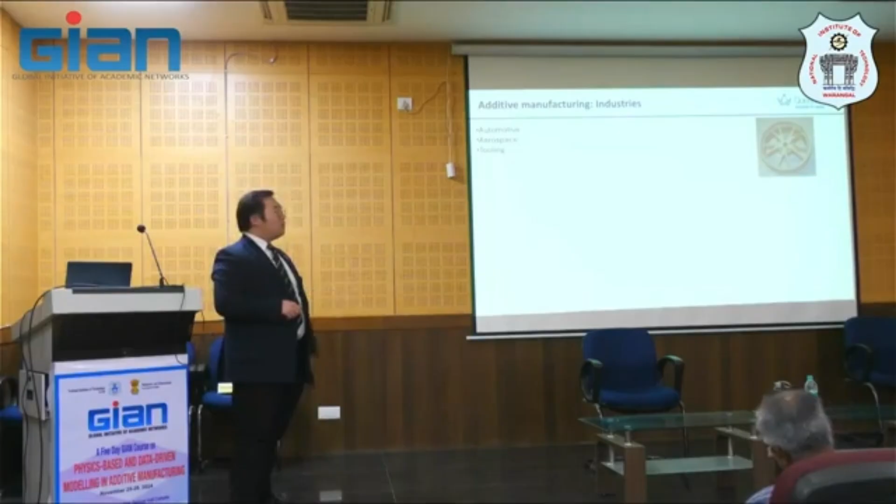So again, now it's more about where additive manufacturing in metal finds its application. In automotive, aerospace, and tooling, this is some example in automotive. BMW has used this to print some wheels. Again, this is a luxurious car, so you do it on purpose somehow, but some parts like a turbocharger are 3D printed now, with a lot of research.

I can say that I witnessed, 10 years ago, a big automotive company approach us in Oxford to research automotive parts for 3D printing. Having said that, you see a lot of automotive parts that have now been 3D printed. So it's not just speculation now, it's real, it's happened.

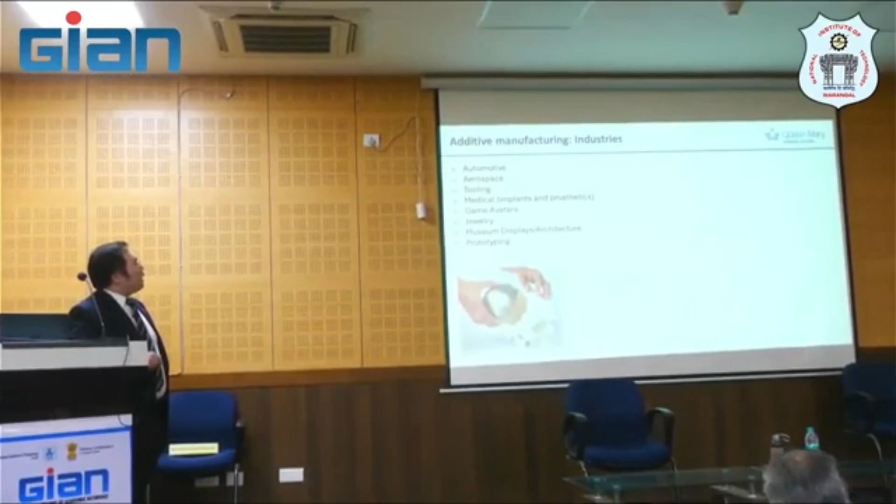So more than that, you also have some application in biomedical implants. I think we will hear more from Professor Kumar with a case study or application. And then you also have game avatars or something like that. This is also a big market for entertainment, as well as jewelry. There are a lot of patents filed in this area.

Especially, I would like to share with you that some colleagues in the UK did file a patent to fabricate platinum, actually successfully, using some nanoparticles. So this is something still going on. There is a lot of research that we need to do. Again, that is jewelry, so that means a small amount, delicate parts. Again, that is the application.

Or this is architecture or display, which you never could do before. You had to do it by hand, piece by piece, but now you can print it. And this will be useful not only for museum display or architecture, but it may be a prototype for assisting a medical doctor in learning or studying a very complicated channel. If you use an X-ray 3D scan and then print some sensitive location, this 3D printed proof is useful for education as well.

So there are numerous opportunities for 3D printing: design, as I said, ultra delicate components or geometry, rapid prototyping. You also shorten the design cycle. And you don't need unnecessary assembly. If you see here, this is a bone. Let's say someone has an accident, a bone fracture, and you want to print something that matches the cancellous bone with low stiffness using titanium. Now it's probably possible, but it's still in the lab, not commercialized.

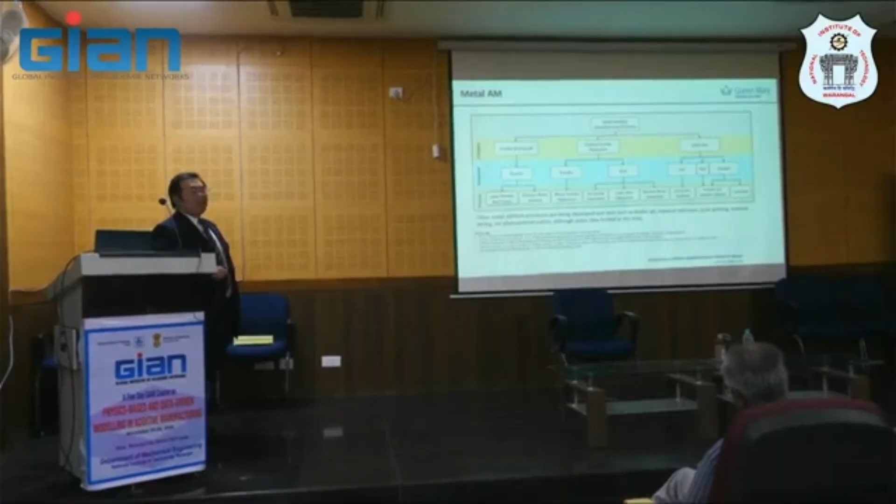So in the category of metal 3D printing or metal additive manufacturing processes, we have powder bed fusion, which is one of the standards. We have directed energy deposition. We have solid state formation like sheet lamination. The feedstock associated with powder bed fusion will be powder for sure. And then you may use a different process to process this powder, using a laser heat source or electron beam heat source. Again, they are so different in detail as well as in the physics, the way they melt. So this will be talked about a bit later.

Directed energy deposition. If you talk about powder feedstock, it can be an array of powder deposited onto the substrate. This process is known as blown powder deposition. And if you talk about wire, there are a few options you can choose: arc-based deposition, laser wire, or electron beam deposition. Again, this depends on the heat source you use. There are some detailed differences in different manufacturing processes for different materials.

And then last but not least, the solid state. So you may use ultrasonic additive for foil here, not much research from my side, or friction stir additive. I have some research on this. Or if you combine this and this, for example, we call this hybrid manufacturing. Again, let's leave this for later.

And then there are still other additive processes, like I mentioned, especially for metal, they can use binder jetting as well, material extrusion, material jetting, or even liquid bath is possible. Again, we're not talking about that for the moment. We're just focusing on the first two sections. I call these processes melting-based additive manufacturing. So you need to make it melt, make it liquid first, and then you join them together.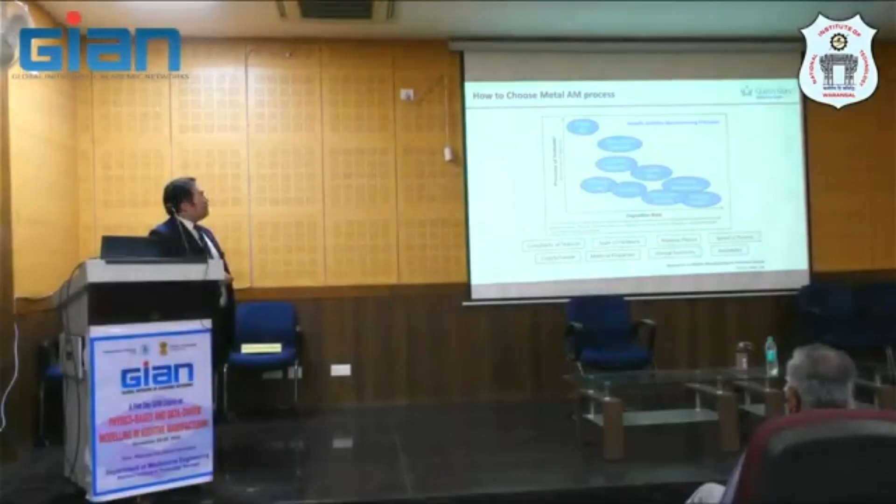And then how to choose one depends on different factors. I borrow from a NASA slide here: it depends on the cost, material property, internal geometry, availability, scale of hardware, complexity of features, the deposition rate, and the precision of the features are also big considerations. Why are people still using powder bed? Because at the moment it gives the highest resolution for metal 3D printing. The resolution is the same as the powder that you use. The finer the powder, the smaller resolution you can achieve.

For example, now there is a new term called micro LPBF. That means you print something at the micro scale, sub-micron powder length scale, for some electronic or delicate part purposes. Again, for arc-based deposition, the characteristic length scale is larger because the melt pool size is actually around millimeter scale.

So you're talking about large components, but still you need to think about residual stress development, or thermal management is key. So again, we will go to that in the different processes and the science behind that later. So this is in terms of process, AM process.

And then, as I said at the beginning, in additive manufacturing or AM we need to talk not only about the processes, we need to talk as well about the material. So this is a summary of the materials used so far, but not fully inclusive, in AM. When I say AM, it means LPBF using laser, PBF using electron beam, and then direct energy deposition. So you will see this is all metal AM.

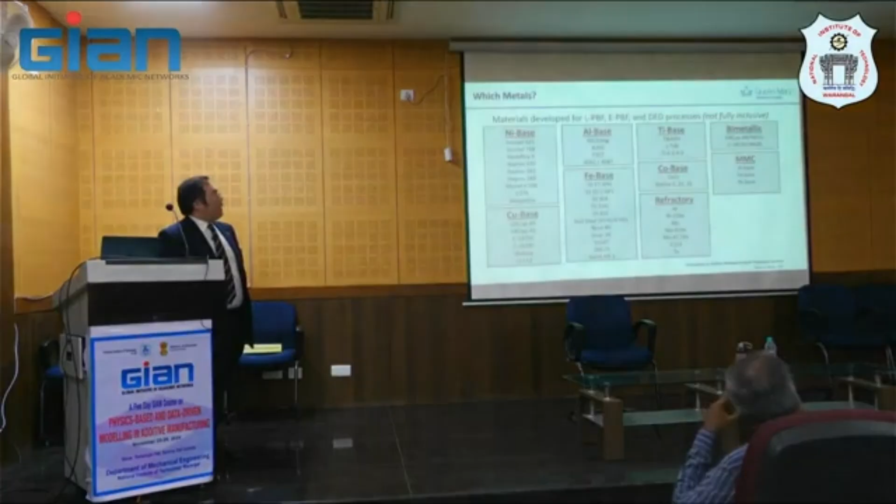Again, cobalt based, cobalt chrome, is also for biomedical application. Refractory attracts more attention at the moment. It's hard to print high temperature, high melting point material, used for space and nuclear application, like tungsten, moly, tantalum. Tantalum is also my research, for biomedical, tantalum printing. And also C103 is a new NASA program for niobium-based alloy for space application. Again, they use refractory, and then they have biomaterial.

As I said, you can print whatever you like. In the lecture later, I will talk about one technique we call in situ alloying. We mix something together using the laser, so we alloy them during printing. And then you can do bimetallic, and also you have some metal matrix composites.

It's a lot actually. The very first paper on high strength aluminum alloy, they tried to print it, a paper by Professor Tresa Pollock from UC Santa Barbara. Again, this is the same concept as casting, they use inoculant particles to break down the microstructure. Anyway, this research is still going on because there's not a lot of information, and also research for specific applications.

Again, I would say this is an opportunity, and as I said, every example I mentioned is related to the application you're going to use. So I think this has to come in a package. We cannot talk about them individually. Process, material, application have to come together. That's the key. And if we look again, nothing is actually perfect. We need to understand the advantages and disadvantages.

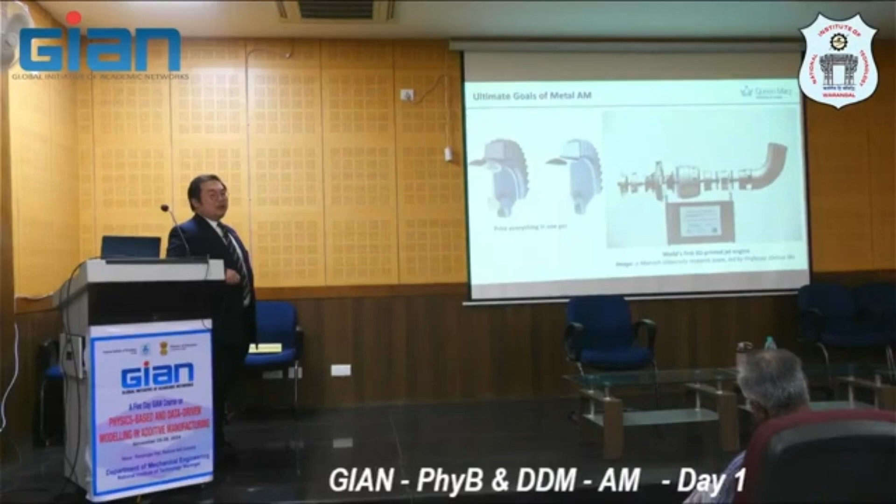And my intention is to use this time to prepare, because the next session will probably be long, so I'll try to introduce something first. Before finishing this, I think we still have time. Do you have any questions at all? I think I'm speaking too long. Any questions before we move to the last part, just to give an intro for the next lecture? Everything clear?

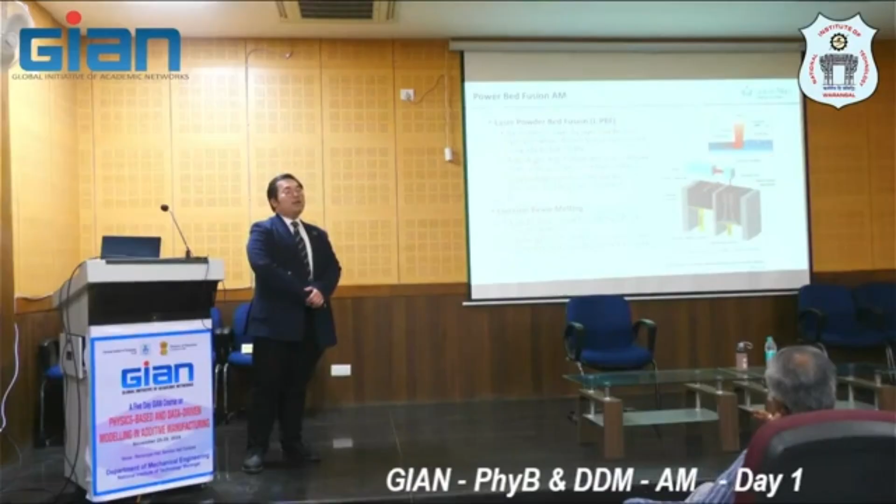Good, thank you. As the program stands, we talk more on melting-based additive manufacturing, especially the powder bed fusion process. As I said earlier, in powder bed fusion we have two heat sources we can use, either laser or electron beam. Laser, like EOS and SLM Solutions in terms of manufacturers, and electron beam, for example, the Freemelt company from Sweden. The basic process for LPBF is layer by layer. The feature is melted using a laser and solidified. That means there will be laser-matter interaction, and solidification will play an important role.

The advantage of this process is that this is the highest resolution metal 3D printing so far, so high feature resolution with complex internal designs like cooling channels. This diagram illustrates the printing process. But these advantages are limited by your build chamber. So the scale limit doesn't provide a solution for all components. Basically, you cannot print everything. It's about how you select which component to print.

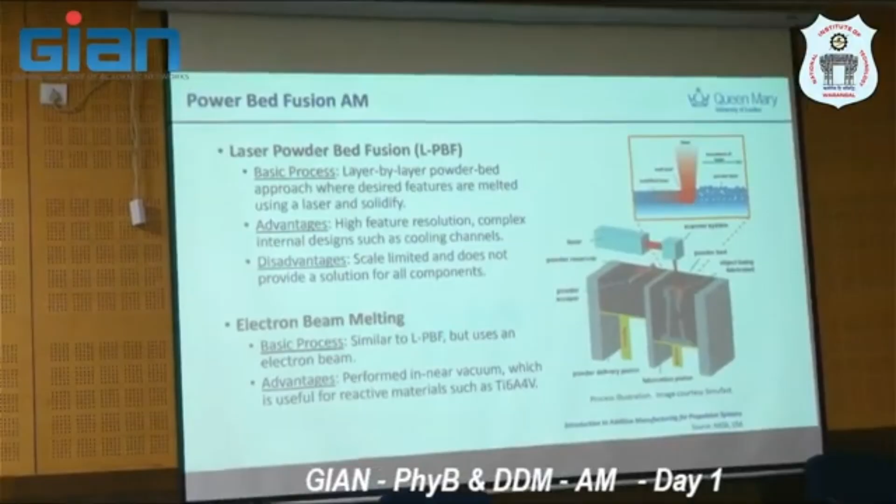The electron beam process is similar, layer by layer as well, but uses an electron beam. From a metallurgical perspective, this is an advantage for materials highly sensitive to oxidation, like titanium, since it is performed in near-vacuum conditions. So you don't need to worry much about the oxygen content, and it's useful for reactive materials. But again, this is a more expensive process than laser, though some companies are trying to reduce the price to match LPBF. From the microstructure perspective, these two processes provide different microstructures. I will have a slide to show next.

So, for example, this is an application. When I say material and process, we also need to say what the application is. NASA already uses it for a rocket chamber here. I don't know much about that, but just to show you, this is what has been used already.

And powder bed fusion still has some challenges. When I say challenges, I want to combine them with the melting-based additive manufacturing processes. These include, but are not limited to, directed energy deposition, or blown powder, and powder bed fusion, previously called SLM, or selective laser melting.

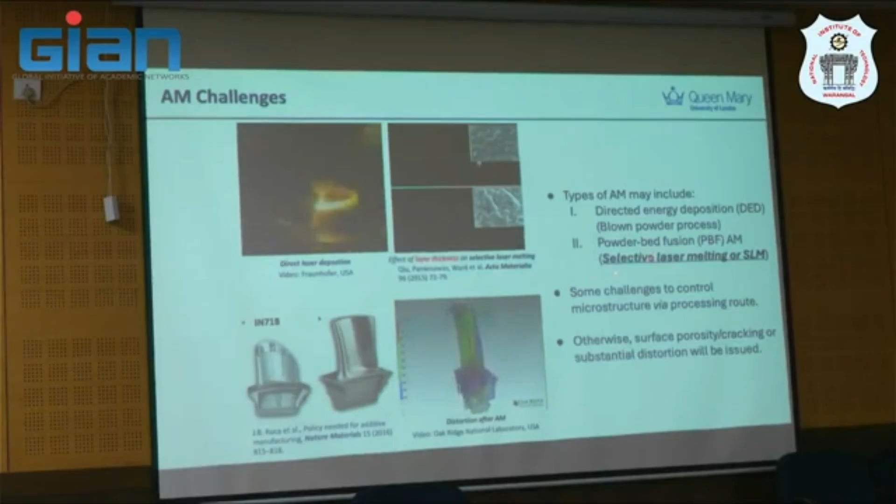So, some challenges to control microstructure. Let's see here. This is the DED, or directed energy deposition, and this is LPBF. You will see that this is actually from a Fraunhofer video here. You will see it deposit material layer by layer, and this is a thin wall section, supposed to be like a turbine blade repair. And then you will see there will be a lot going on. I will show you in the next lecture.

And then this is the LPBF, which is a laser-based additive process. This is the very first publication of mine, published in Acta Materialia with some experimental people. So this is the effect of layer thickness. If you choose wrongly, you will end up with subsurface porosity like this. It's just a small difference, but you will get very different surface roughness. This work actually started in 2013 and was published in 2015 in Acta, and now it's received more than 1,000 citations. It's the most cited of my papers so far.

And then another challenge is surface porosity or cracking. And if you print this one using Inconel 718, this is the nickel-based superalloy. Again, this is a commentary in Nature Materials. They say the policy needed for additive manufacturing to make this part go from A to B, which looks like a good surface finish, but this is using some surface treatment.

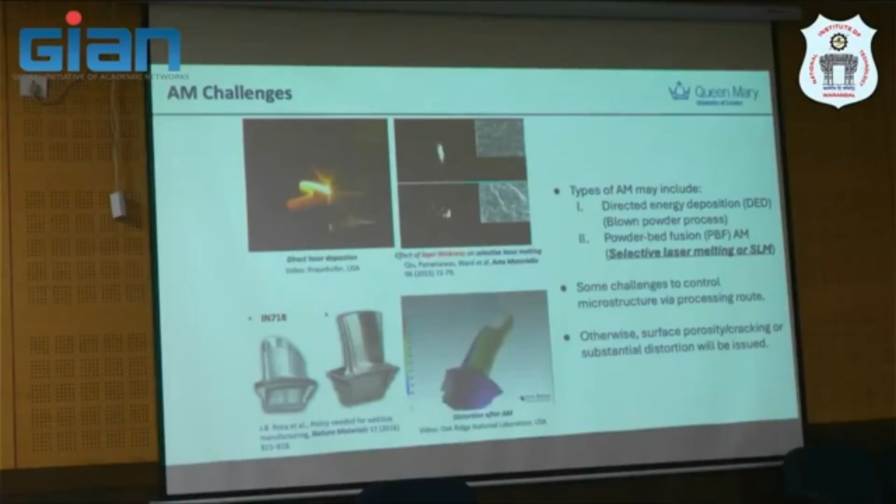But again, if you don't worry about surface, you don't worry about microstructure, the next thing you worry about is distortion. If you use neutron tomography to scan it, and you compare the CAD, or computer-aided design, model with the real print, you can map the differences by location. The purple one means high distortion. That means there are some parts that need to be taken care of. That means in the future we probably want to do a digital twin, or correcting in real time, on the fly. If it distorts by this bit, you correct it, something like a closed loop control. Again, in order to do that, we need to understand the process much better.

But if you go into the very detailed length scale using X-ray imaging here, you will see that the way the metal melts is quite different from the way you introduce it into the model. So in order to close this gap, science is needed for additive manufacturing. That is my research area, actually. So we need to understand from this local melting condition to making the big part that can fly in the air. And this way we know how to melt it, and we will know how to control microstructure and property.

And that means the complicated physical phenomena that occur at this micro length scale give rise to defect formation, which is already proven in many applications. So AM, or additive manufacturing, modeling is key to gaining better understanding of the process in order to control the microstructure and design the property that we want.

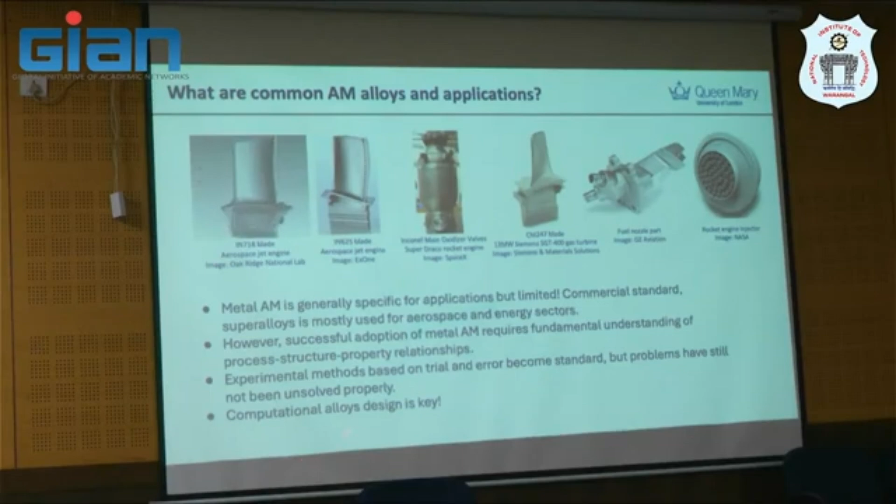And then computational design, or alloy design, or material design is probably key. I will show you as well, probably today or tomorrow. This is the nickel-based superalloy. You will see that since the first inception, there are so many processes optimized for different compositions. So even in one class of material, they now have more than 200-300 grades available on the market, not including the ones in research.

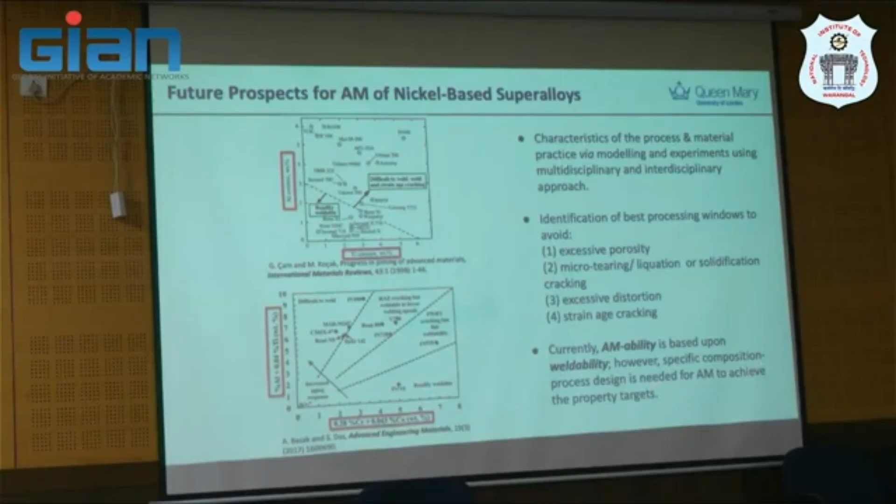That is the question. At the moment, my argument is that additive manufacturability is based on weldability. That's why I said we need to make a clear difference. It's not completely similar. I have a paper published in Additive Manufacturing about additive manufacturability. There are specific composition designs that can achieve some target, but you need to capture the correct characteristics of the process. We're toward the end of the slides now.

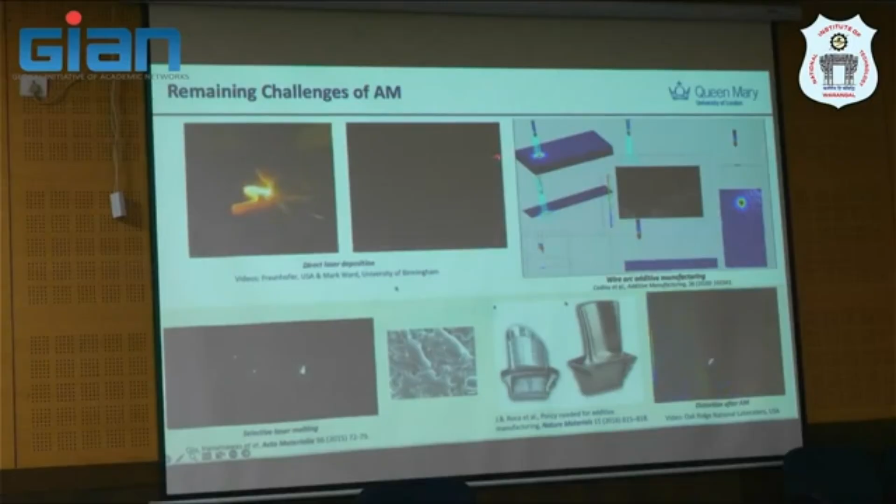The remaining challenge is still, I come back to this slide that I will use for the next session. It's about the interaction at the lower length scale. I think it doesn't show very well, but this one will show the melt pool. What is the liquid metal actually doing during the process?

Or this slide, this is wire-arc, so you will see clearly the spark of this one, when the metal deposits: how the material deposits, how the temperature distributes, and how this fluid flow will all influence the microstructure that emerges and hence the property. And this will be the topic of the talk for this course, basically. I hope this is not too scientific, but I hope this will be useful.

And to summarize, I want to say opportunity and challenge from one of my Nature Communications papers, saying that we have both technological challenges and scientific challenges that we need to solve in order to enable this technology for the future. This is not inclusive, but there are key challenges that people are looking at. For example, from the industrial perspective, they are looking at in-situ monitoring systems like thermal imaging to correct something wrong on the fly, or NDT, which is non-destructive testing qualification, like in the implant. You want to know where the defect or significant porosity is without any destructive method.

Heat treatment or post treatment, thermal imaging and thermal management are also important. Again, component manufacture is still a challenge: how to make a big part without distortion and with the correct microstructure. From the scientific challenge, how to make powder is also a challenge. It's so expensive now. Atomization is so expensive. How can we reduce the cost with controlled quality? The smaller the size of the powder, the more expensive per kilogram you get. And then heat source powder interaction is still a challenge as a function of material as well.

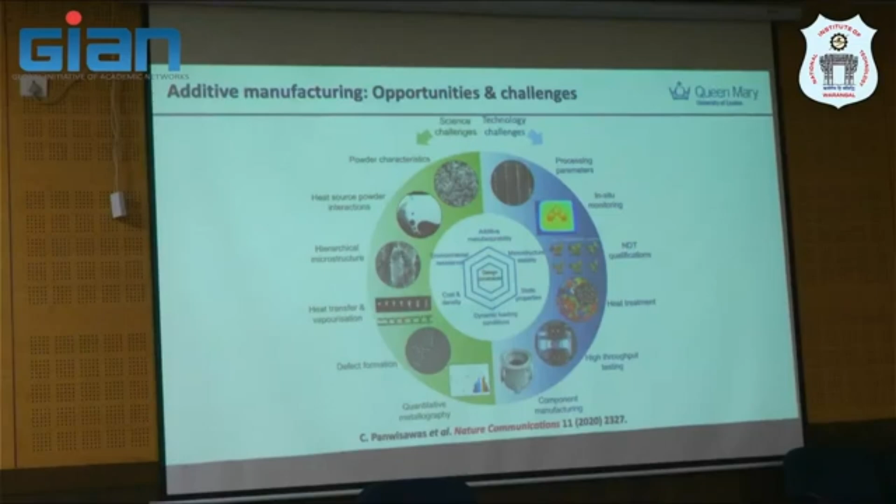Having said that, sorry for the probably fast presentation. In the next lecture this afternoon, we'll talk about what physics is happening in the process and how we can model it. And then what are the critical unsolved problems from the scientific and technological perspective that we need to research? And probably at a later date, I will talk more about how we can characterize the processing-microstructure-property relationship for a material system of interest.